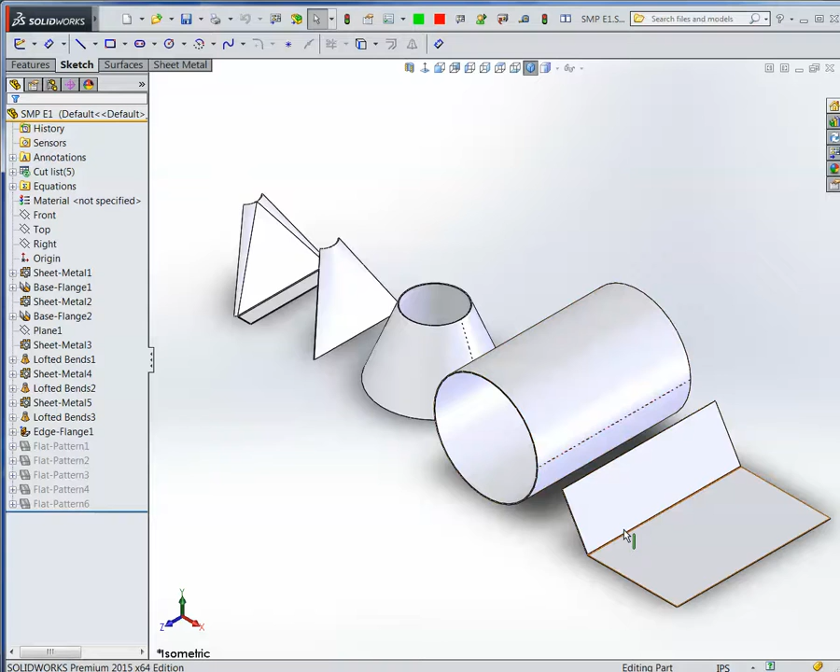The features are capable of generating, I'd call it the flat planar part. They're capable of generating a round or a radius part, like this one. They're capable of generating a conical part, and this one here is just a free-form part using the loft.

The challenge with it, once you use a free-form part using the loft, is there's really no planar surfaces on it anymore, so you can't really do much with it other than maybe pop a hole through it, using one of the front planes or right planes or top planes. You're kind of limited. If you can work around it and make your shape using a planar surface, a conical surface, and a round surface, it leaves you a lot more freedom in the future for what you want to do with the part.

I'm going to start with a new part. I want it to be a sheet metal part. So almost all the commands are grayed out. It leaves you with this one in the corner, which is base flange / tab. So it's actually two commands. You're either going to create the base flange, the starting point of your sheet metal part, or you're looking to add on to it by adding a tab to it.

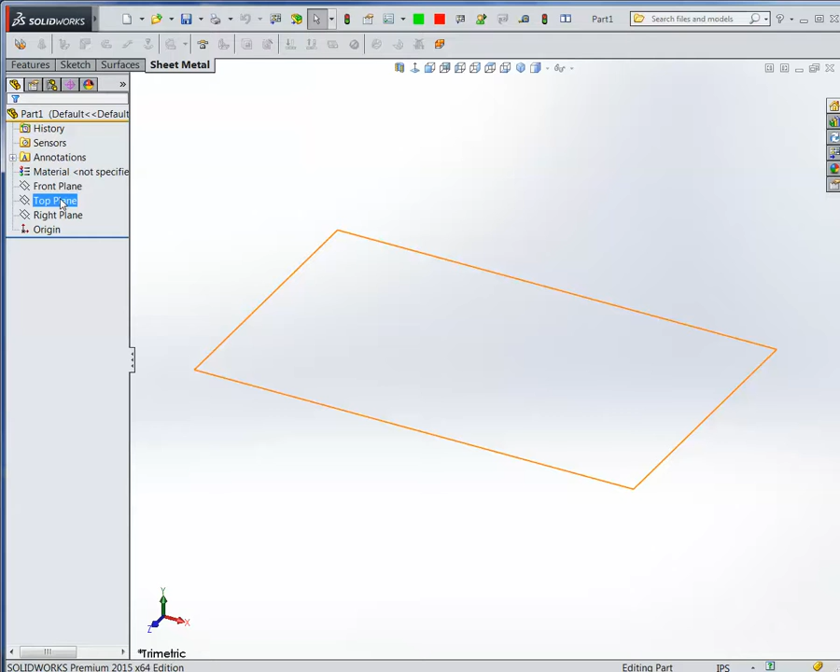A tab is just some more flat metal. If you need to add some flat somewhere, then you would use that tab portion of the command. But you just simply start. I'll pick the top plane and I'll pick a sketch, and I'm just going to sketch something. If you want a sheet metal part, you can sketch it, put your dimensions on it. If you want holes in it, you put your holes in it. If you want other features in it, you put your features in it.

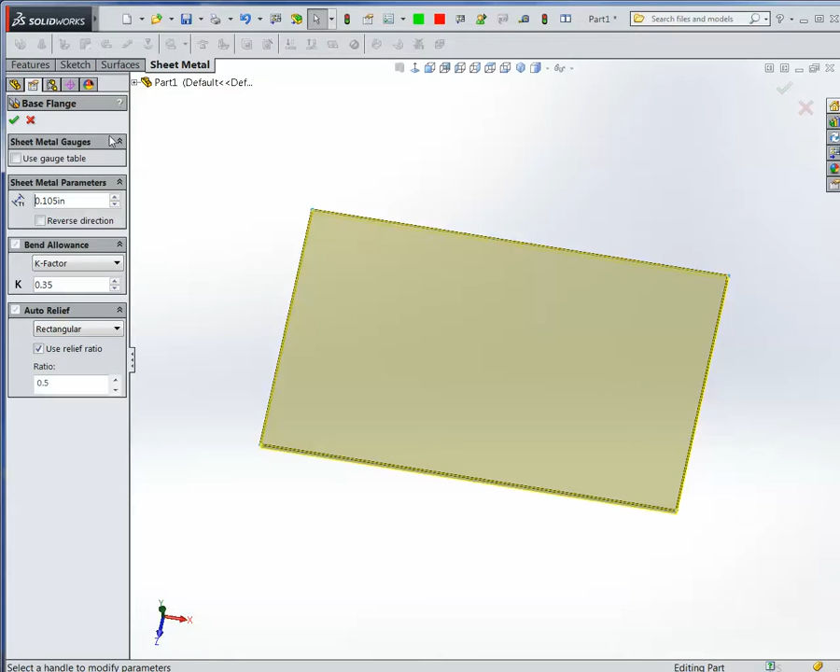If you have a completely enclosed sketch, you're going to wind up with, get it here. I'm going to pick a gauge. You're just going to wind up with that. It's just a nothing part. Whatever you draw is what you get. It's going to be one metal thickness, and it's going to have features above it and features below it that are related to the sheet metal properties and how it's bent up.

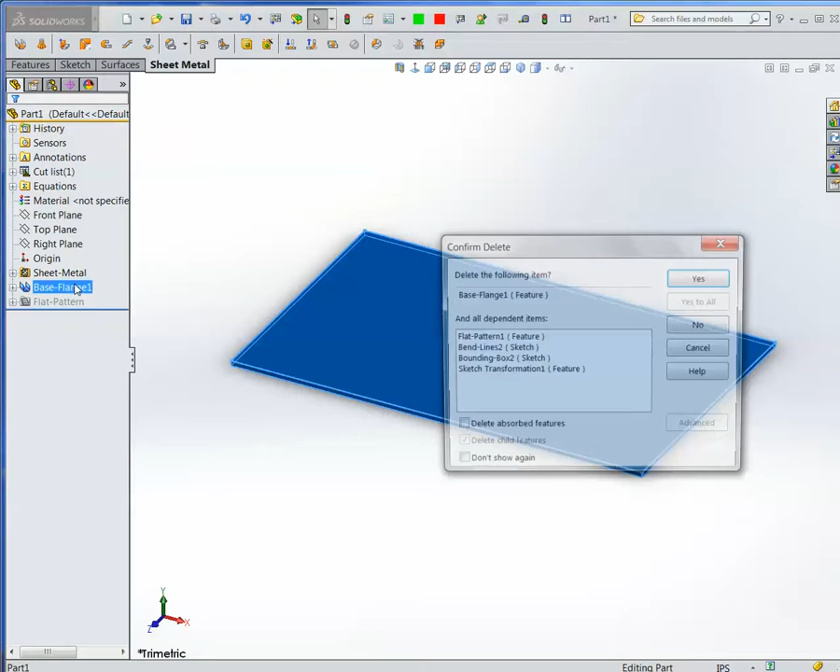And that command actually, yes, the command actually is identical to the command in the regular features for just a basic extruded command. I can do the same thing there, and I can pick 60 thousandths, and I have the exact same part. It just doesn't have the sheet metal parameters attached to it that came from the gauge table.

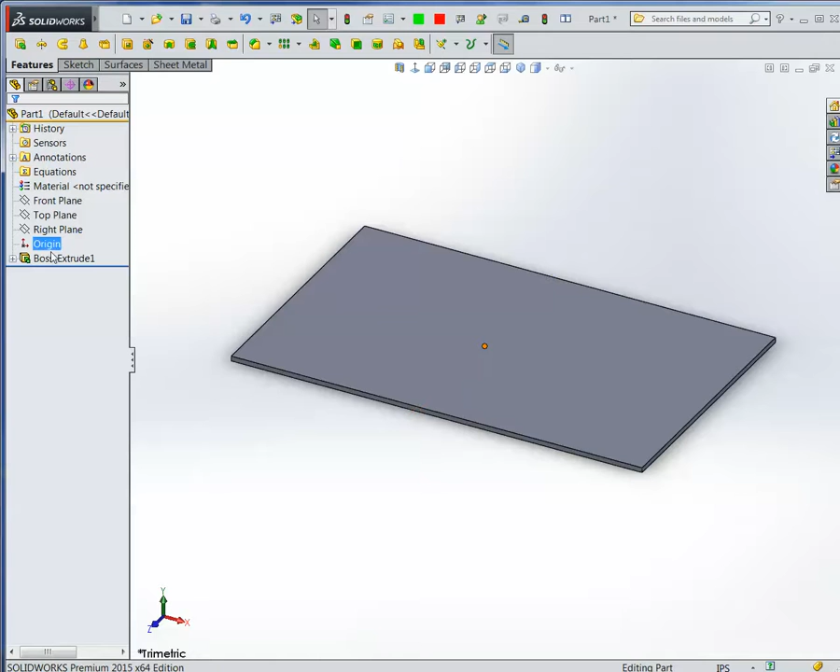If I back off from that, so if my part is predominantly flat with maybe a bend here or there, I would start with a closed-in sketch. If your part is not predominantly flat, you can start with the shape that you would see as you stood down the side of the press brake. And if I see something there that's a couple inches, two by 6 is fine. I could draw my shape.

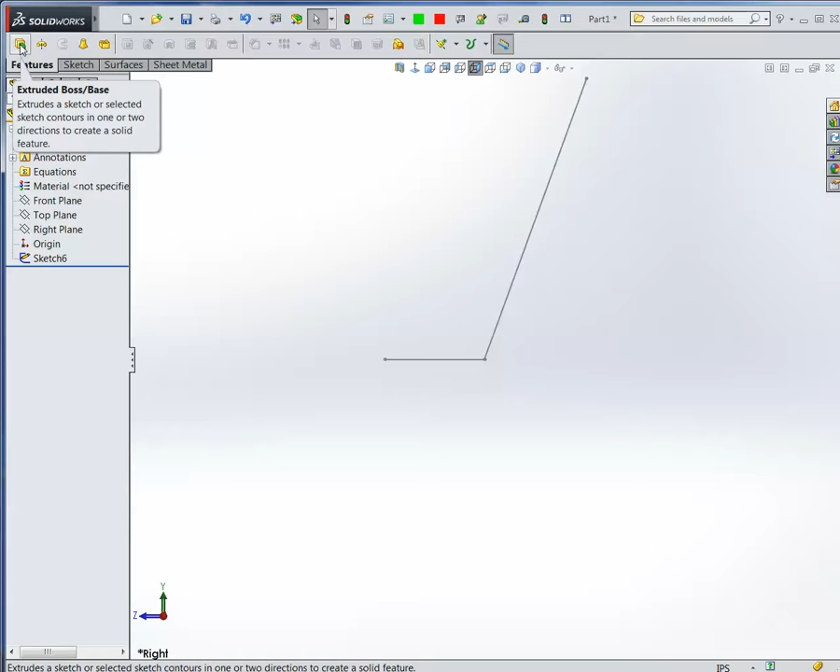Now, if I were to attach that to the regular extruded boss, it would default to a thin feature, and it would let me pick the thickness. I say 60, and I want to auto-fillet it, and again I say 60, and I want blind, 12 inches.

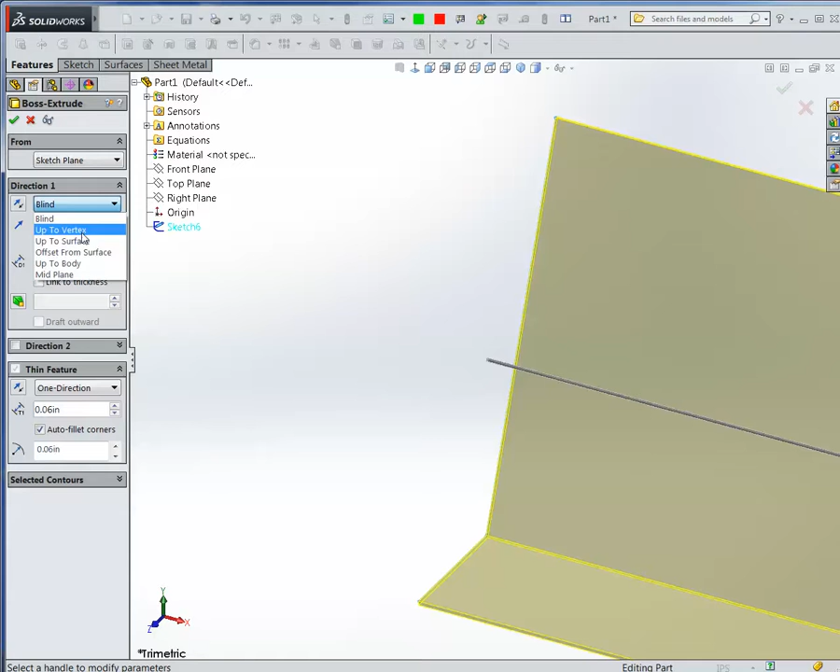I get this part as if it looks like it's press brake formed. It has a 60 thousandths inside radius, 60 thousandths thick. So it's a command we should all be used to if we use the SolidWorks features. But the base, if I want the sheet metal properties, I can take the exact same shape and I attach it to the sheet metal.

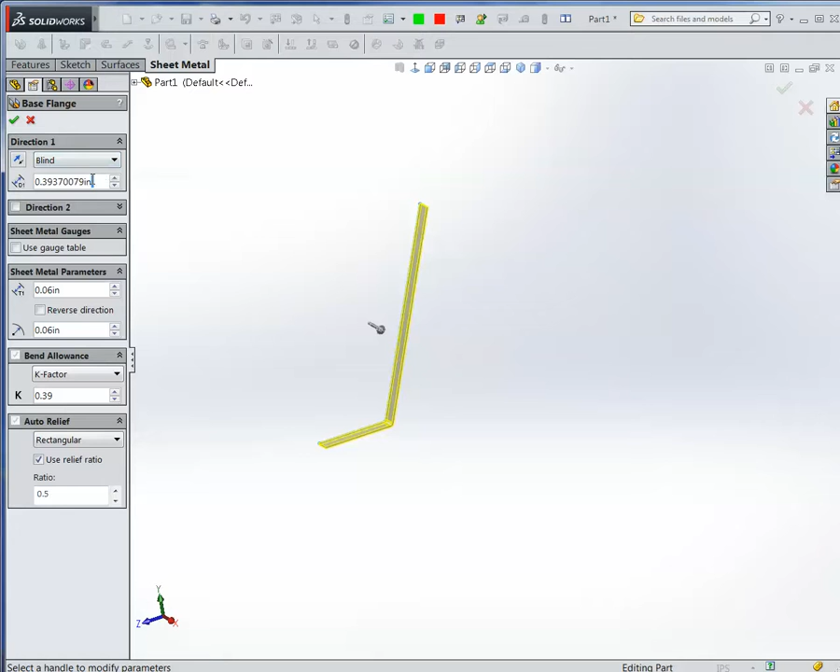I do the same thing and say 12. Use a gauge table and say 16 gauge. And I'm set up with all the same geometry, all the same shape, except it adds this folder at the top and a flat pattern at the bottom. So the command is no different than the one we find here. It just adds other features.

If I look at what I selected, a gauge table. I picked 16 gauge. When I pick 16 gauge, it's an Excel spreadsheet that gets information from it. The spreadsheet has on it this typing of 16 gauge. It has an inside radius of 60 thousandths and a K factor of 0.39. So it's things that we figured out a long time ago. We set it up in a spreadsheet, so we don't have to figure it out every time. We just click the gauge table and away we go.

Are you using a different K factor for every gauge? I'm using a different K factor for every gauge. And if I want, I can use a different K factor for every radius. If I got a 16 gauge with a 1/16 inch radius, I use one K factor. If I have an 1/8 inch radius, I use a different K factor.

And we all understand what a K factor is? Locate your center point. It locates what we call the neutral axis. Yeah, zero stress. If I look at, where's my K factors? So my K factors, here's the spreadsheets form.

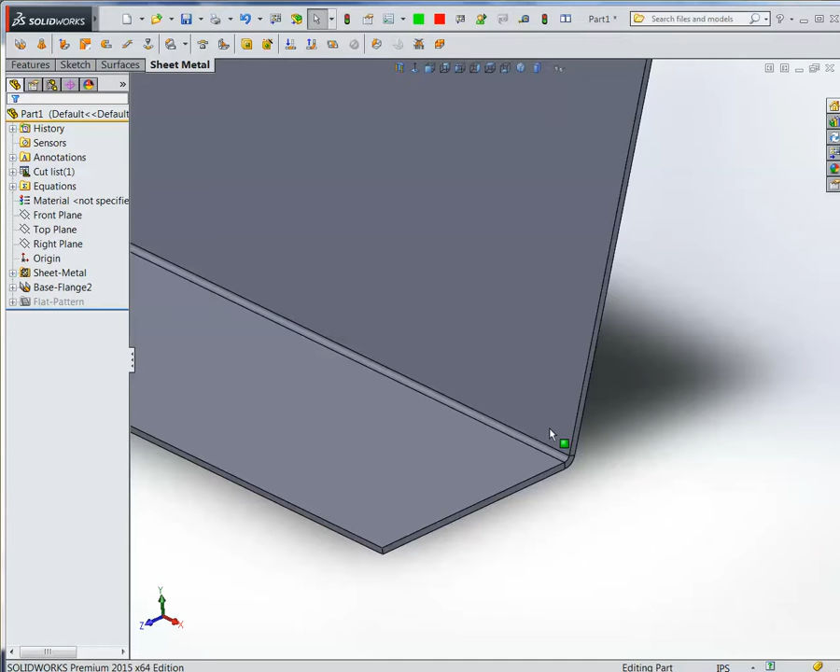Are you typically making the radiuses the thickness of the material? We do. They might not be that when I get it, but when I had to decide how to model it up, they really weren't a radius. They're kind of smashed in the corner and deformed. So in the end, I just said, okay, I'm going to call the inside radius a metal thickness, and I'll keep changing the K-factor until my flat pattern gives me my blank, and then it's just modeled up that way.

If we look into what we're actually getting out of the gauge table, we're getting the things I said. It looks like a 16 and a small GA because that's what I typed in. It's 0.06 because that's what I typed in, 0.39. But then it adds another feature down here, which if you want that in there, you just pick something. But to me, that's not the best auto relief.

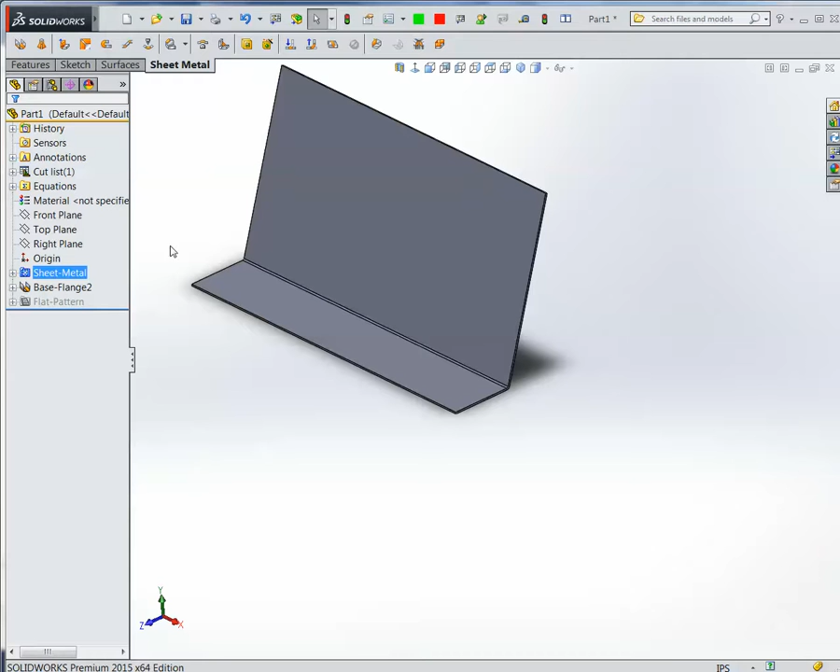If you're already familiar with sheet metal, to me the best auto relief, if I go to add a flange on... I'm going to assume you don't know this command. If I want to add a bend, I'll go to the edge flange or one of the other ones. If I want to add more flat, I'll go to this one, pick a surface I want to add flat on and just add some flat off to the side. And whatever you draw is what you get.

If I want to add a bend on it, my favorite is just pick that one. It's going to add a bend on it. And you're looking to select an edge, like this edge or that edge. Either one is fine. You pick the back edge, and when the command starts, it'll pop out the back side.

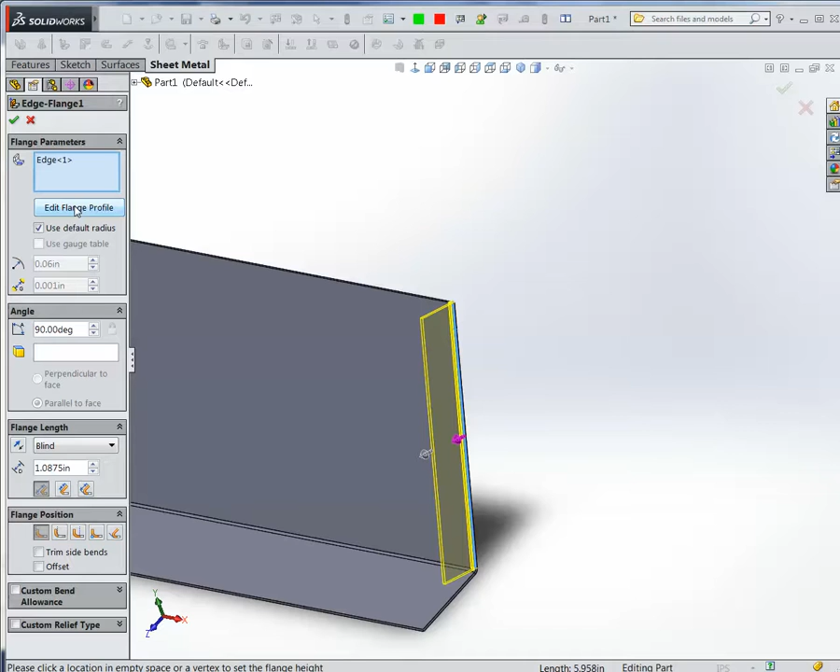But then you can just move your mouse and it'll go a different direction. You pick the front, it pops out the front side. So you can move your mouse and it goes either way. So you go from there to the sketch, just edit the profile, and you can put dimensions on it how you want it, but you can drag this up.

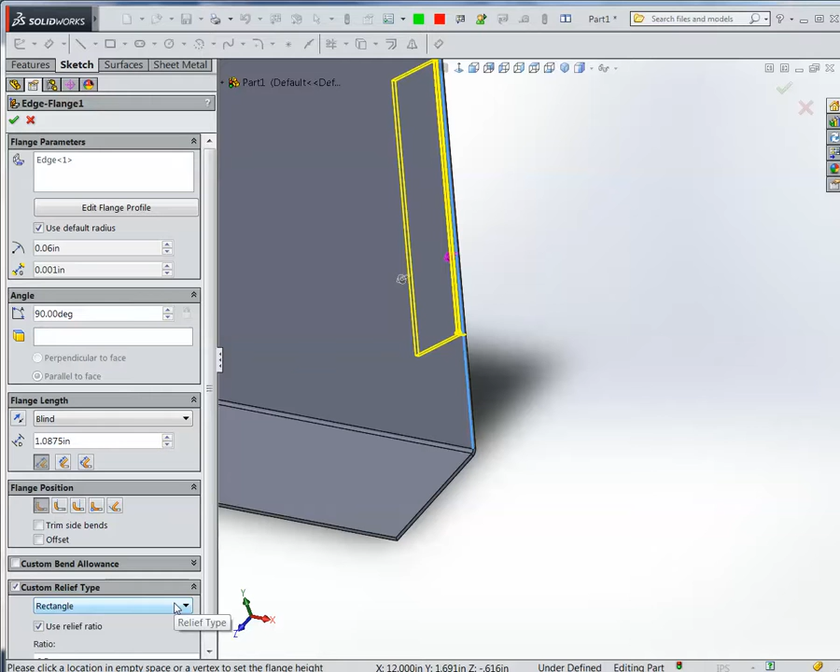And rather than put a cut in it ahead of time and then bend above it, you can just drag it up and put a dimension on it where you want, but then you pick your custom relief down here. And the best one from my perspective, the most cosmetically appealing, is the obround. And you don't use that, you start specifying it yourself. And this is what it's putting in. It's putting in a relief cut right down there.

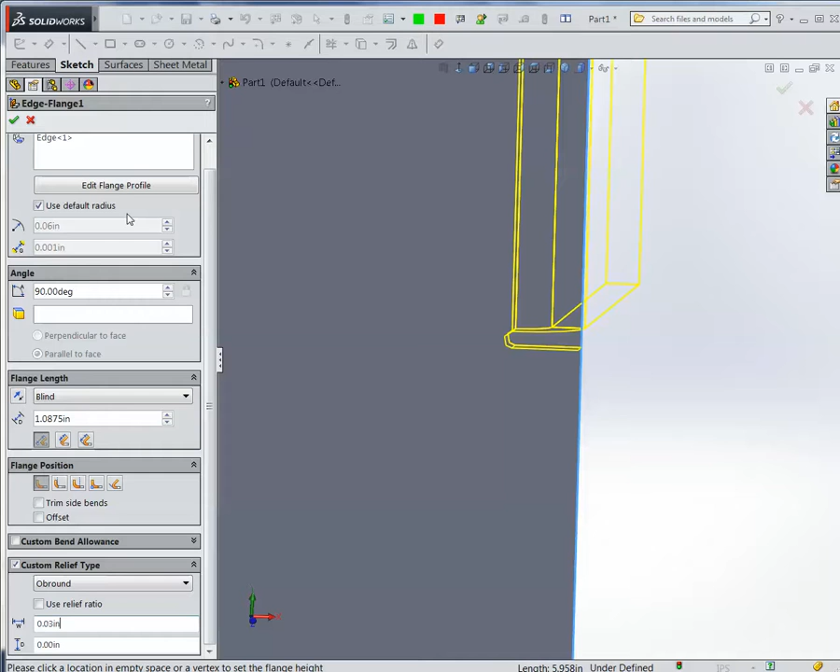And the best one is the width. You can say it's 30 thousandths, that's this. And the depth is the straight. After it gets past the tangent, it gives you some straight before it takes the curve. The depth is that straight, and I like to set that depth at 0. So it'll give me a minimum cut, because it comes right in, and as soon as it gets to the edge of the tangent, it'll take the circle and come back around. You put 30 thousandths in there, it's the least offensive, it depends if the gaps bother you or not.

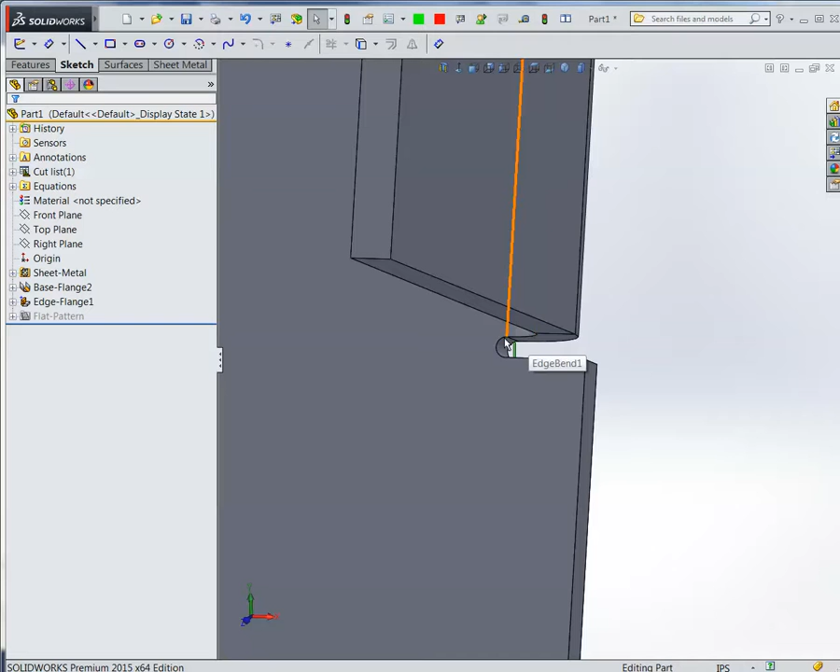Here at FOG, all our metal is typically 12 gauge with a number 7 polish on one side and number 4 on the other side, and we don't want to weld it. We just want the mirror look on it, so we want it to look as cosmetically appealing as possible. So we want as thin as possible with a nice radius. Now later on put an 1/8 inch radius on this corner.

What is that feature called? It was right in the bottom. It's a custom relief type. It's looking to relieve the metal here as you put it out. See, before you know what it is, you'll go in here and you'll put that little relief in yourself. Then you click the top edge to put your bend down so it's all in the right spot. But you don't need to. It's going to put it in automatically.

But if you use that feature from here, this is the relief type. If you say obround, which is a nice one, and we go in here, I don't click custom relief. I just let it be obround. Then it's not going to be what I want. I can't control this. I can't control its diameter. But even if it's obround in the default, I'm still going to go in here and I'm going to say custom relief, and I'm going to uncheck this ratio, and then I'm going to specify the 2 numbers.

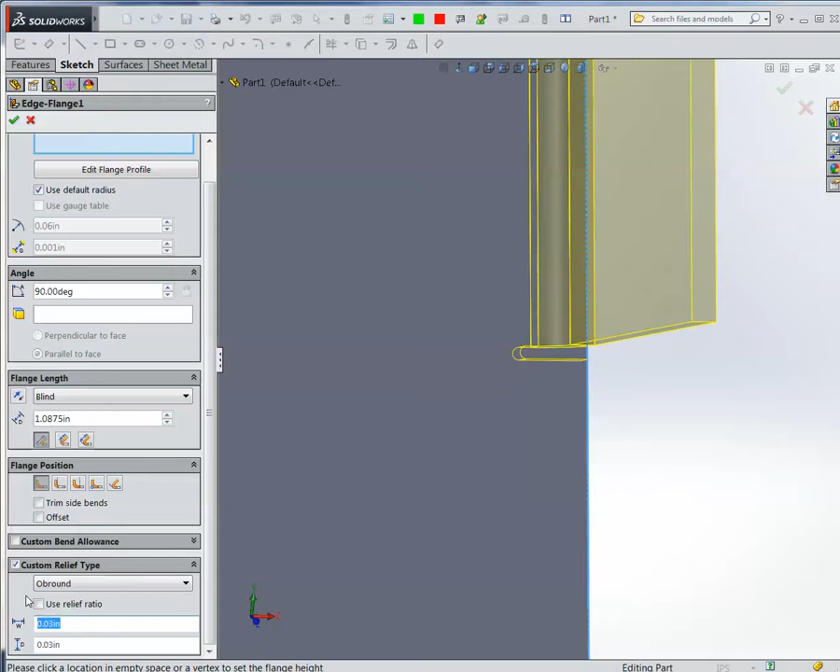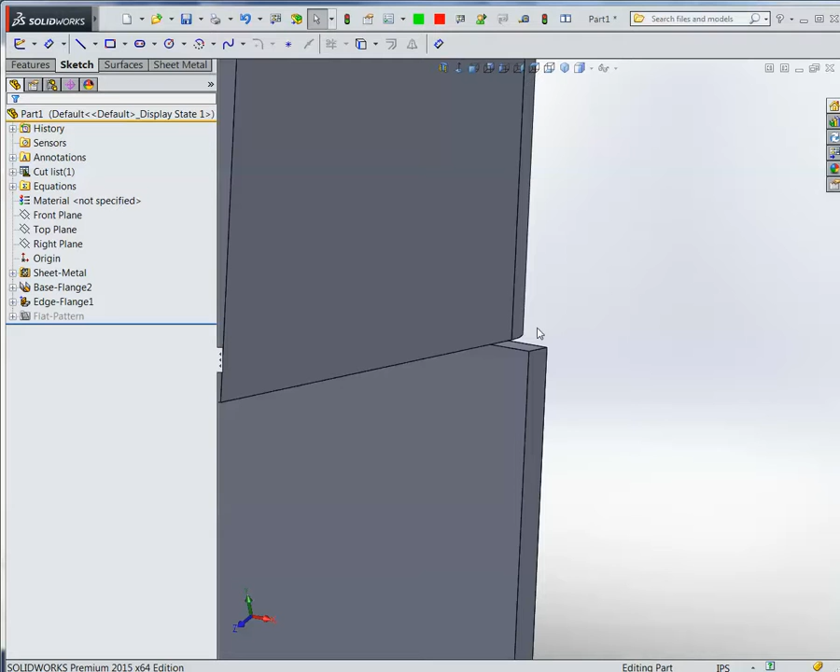And when I worked for Mike Fogg, he asked me to design the enclosure for him, so I designed it. And after it was all built, he asked me to come in and put it together, so I came in to put it together, and the first thing he does is he hands me a file and says, go take all the burrs off. So you go spend hours and hours down there taking all the burrs off. Then I went home and got out all my drawings and put 1/8 inch radiuses on every corner there was.

And for 12 gauge, you put an 1/8 inch radius on. It comes off the laser and you really can't see the radius, but when you rub your thumb across it, it's no longer sharp. And technically, even though it's small, it's faster for the laser to take a corner with the radius on than it is to go to a dead stop and change directions. So go for it, make it look nice.

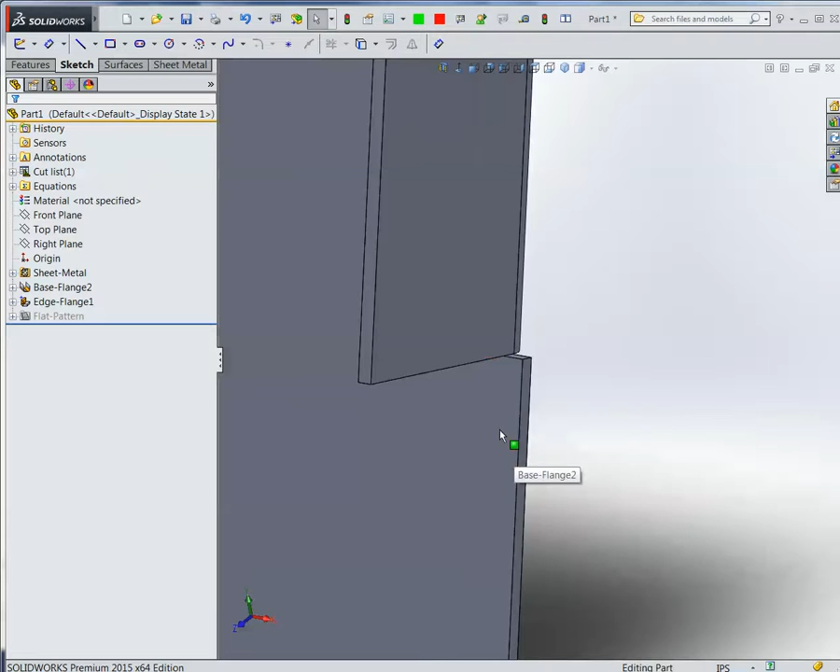Because our machinery, we put our machinery out in a plant that fills bottles. It's pretty dark and dingy. But ours, we light it up and its mirror stands out. It stands out like a sore thumb. It's part of what the appeal of the equipment is, not just simply its function, but also the cosmetics on it. And it's enjoyable to see what you can do to make your parts look really nice.

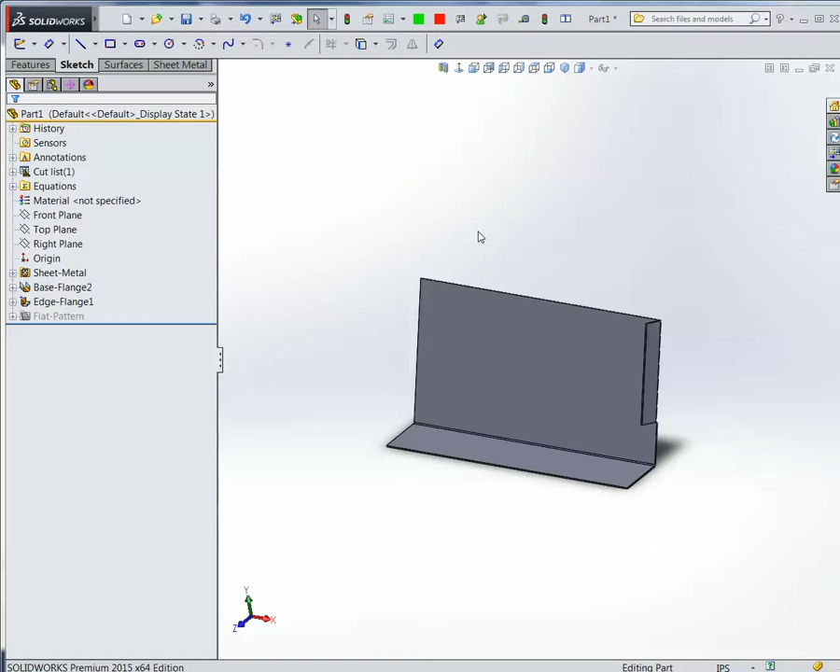So that's one way. If in putting on that flange, you decide you want more than one flange, technically you can grab more edges.

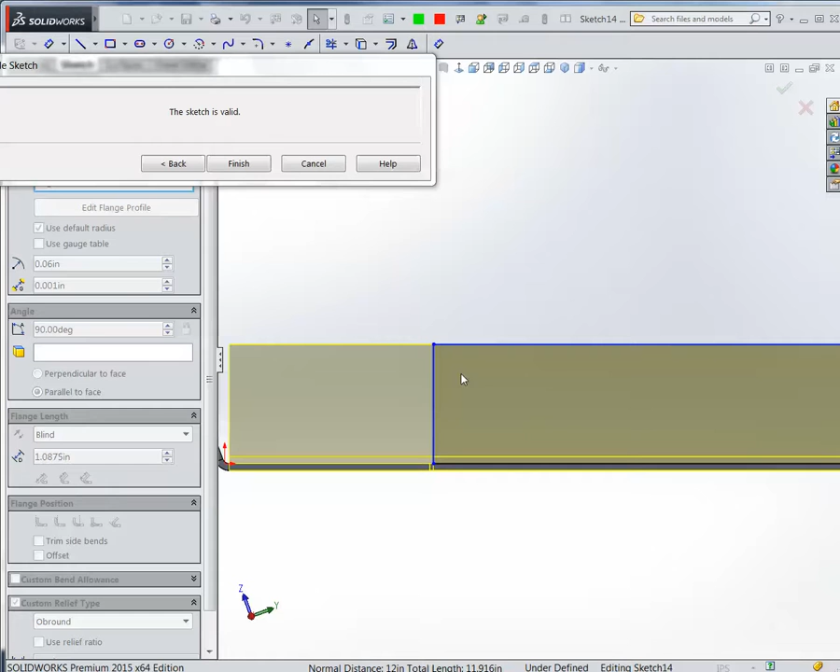Then if you want to edit the profiles of them, you click the one that you want to edit, and then this will take you off to the sketch of that one. If I get this out of my way, and I can do what I want. It has relationships on it. It says vertical. If I decide I don't want that vertical, I'll delete the relationship and I'll make it into something else, whatever I want it to be.

I think I can even put a hole in it. If I say finish, there's the hole in it. So I can do whatever I want with that flange when I put it on. The only problem is if you put 2 or 3 on at once, it'll miter the corners nice for you, but if you want one of them less than 90 degrees, the other one's 90, I don't believe there's a way to control each one individually.

So if I put them on one at a time, I can control that angle individually through each command. So there's advantages and disadvantages. It looks like a smaller feature tree, but there's also less control over it. So that's one way of putting a bend on. I'm going to change the shape.

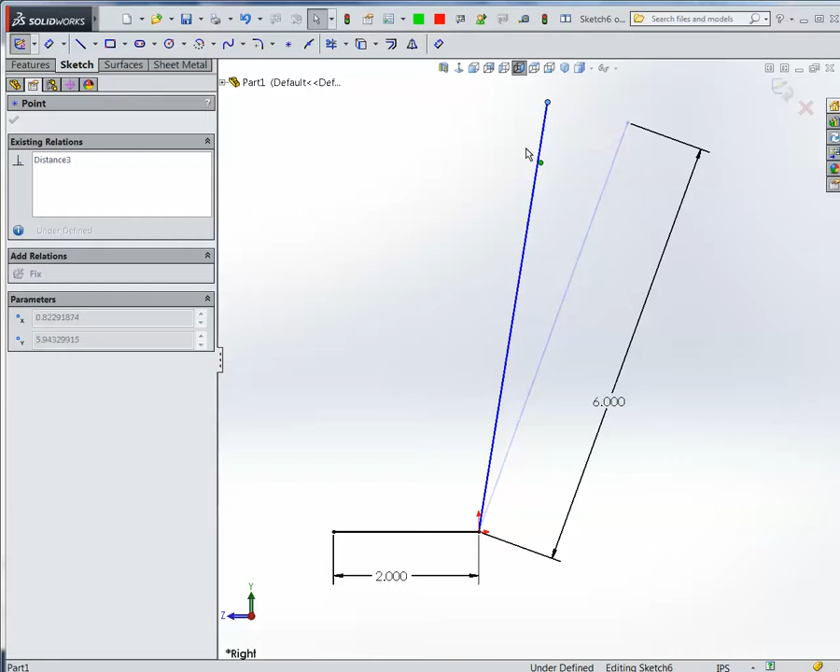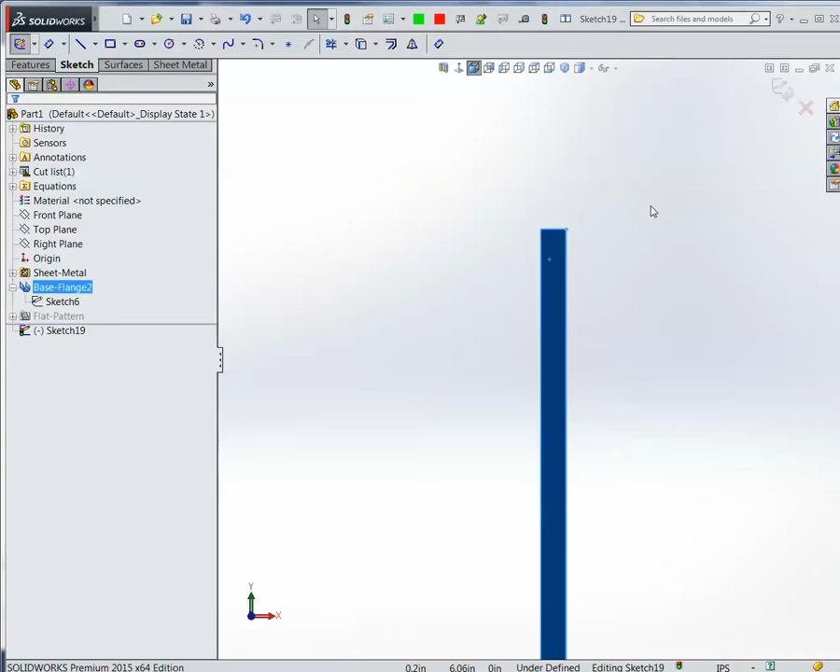Another way is if this edge here has multiple contours, if it goes up, then over, then up, you can actually pick the front surface, if you will, and pick a miter flange. It goes perpendicular to it, and then you can draw your bends on it. You can say, I'm going to come out there, then I want to do this, then I want to do that. And it'll take that profile and it'll bring it out for you.

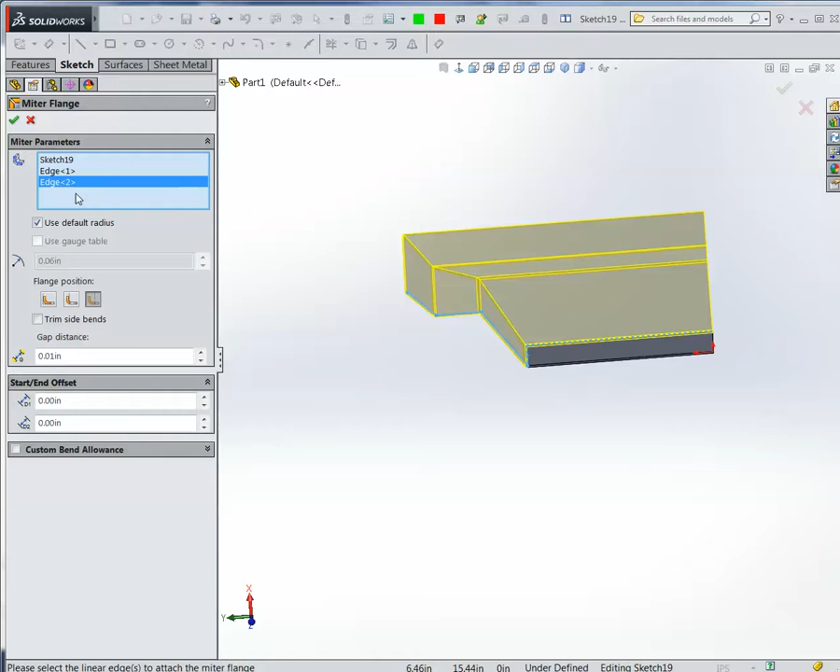If you want to wrap that around the corner, you can pick the back edge one up. It'll miter the back side for you. So typically that's what you want to do it for, is if you have complicated shapes and you go around the corner, you'll pick that. But another wonderful feature is if you have more than one shape and you know exactly what it is, how far over you're going, how far up, you can put them all in at once.

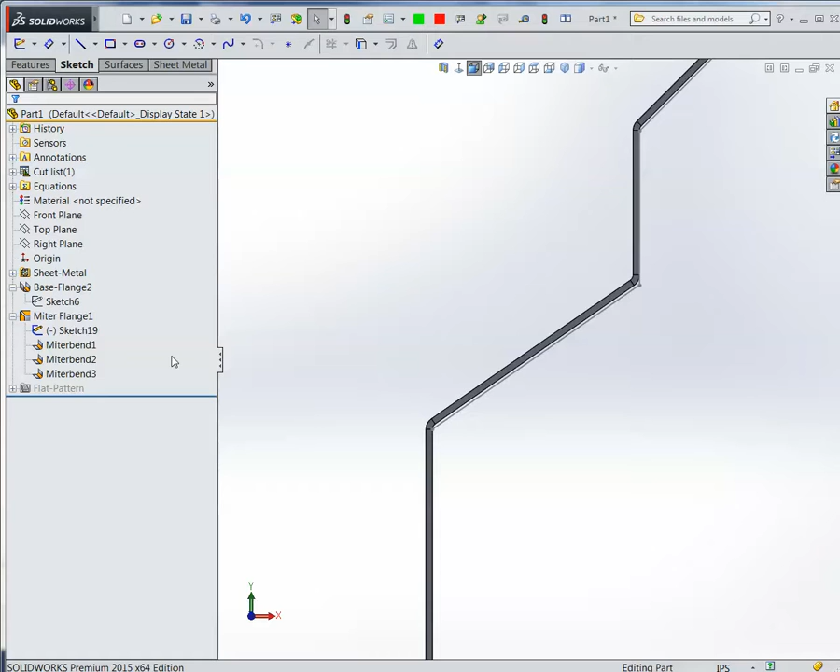The only thing you really need to do that I didn't do is, rather than start like this, you can see what happens when you start like that. It really didn't follow it. See, there's my sketch line. Well, that's a lot of stuff that's turned on. It really didn't follow that first one, so on the first one, if you really want to do it differently, you really want to come down and put the actual radius in, make it tangent to that, and specify it as whatever your radius is. Like mine is 60 thousandths.

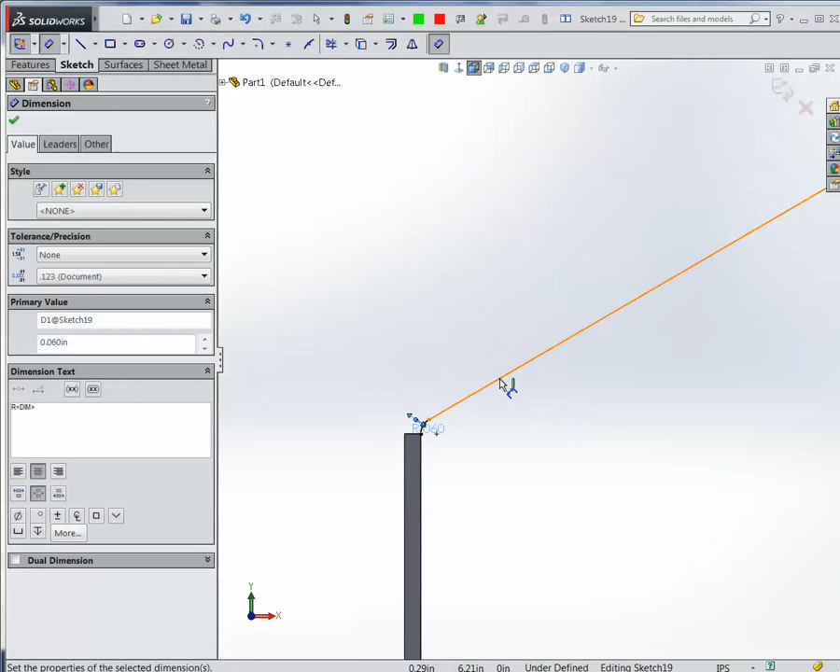When you do that, whatever you drew, you can see it in there. Whatever you drew follows the line that you drew perfectly. But you put your 60 thousandths radius in? If you just start from, I put it in here. I didn't put it in. If you want to, you may, but it goes to the theoretical corner. And here it goes to the theoretical inside corner. But the first one, it doesn't. It likes to take off. So if you put the first radius in, if you're going to extend it beyond that surface, then it'll follow your line perfectly going around. Get that or no? Yeah, okay.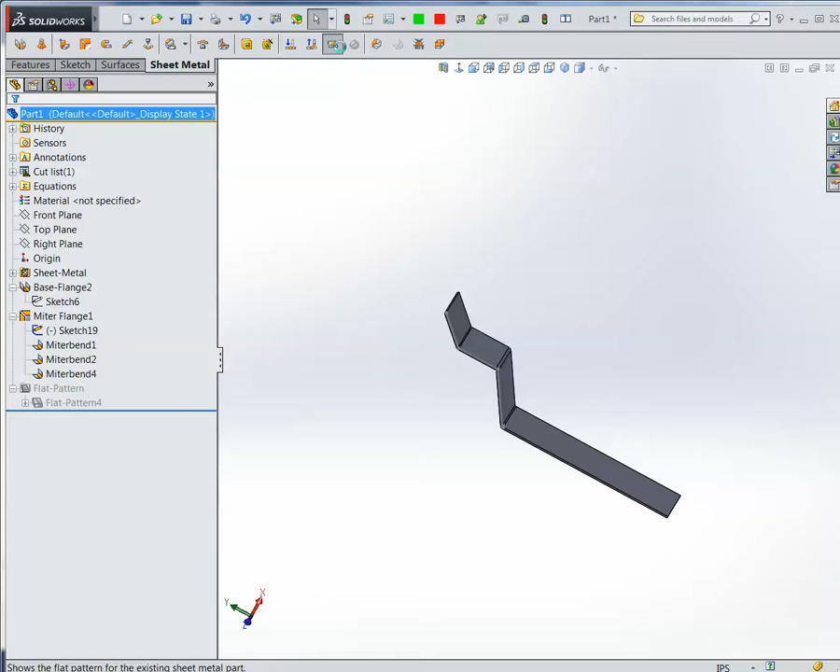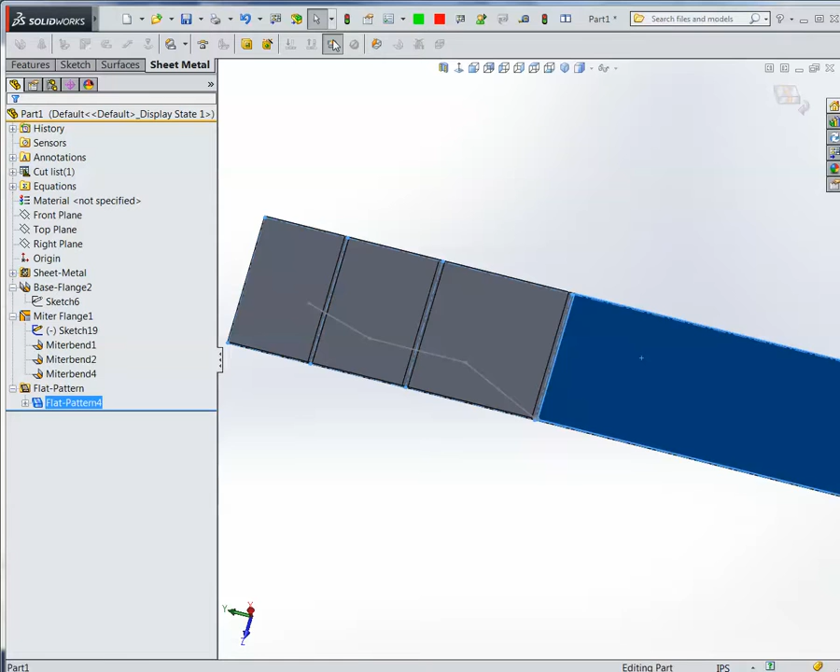So if I look at the flat pattern, find where to flatten it. Edit feature. What you get for a flat pattern is whatever flat surface you have, the flat pattern is exactly the same size as before it was flattened. So this one had a flat surface here followed by a radius, a flat, radius, flat, and the flat pattern will have the same thing. The flat, its calculation for the radius, the flat, its calculation here, and so on.

And the K factor itself is simple math. In calculating a flat pattern, whatever this is in the formed part, it'll be the same in the flat pattern. And it has to figure out how much metal do I need to bend that. And mathematically, the arc length equals the radius times the angle.

So whatever the angle is, if it's 45, then it'll be 45 times pi over 180. That'll give you the angle in radians. And you just got to figure out, you know, what radius do you use? Do you use this radius, or do you use this radius, or do you use one that's somewhere in between? And the goal of the K-factor is to figure the one that's in between.

The K-factor can range anywhere from 0 to 1, I believe. 0 means don't go down at all. Use that radius. If that's 60 thousandths, you'd use that. If the K-factor is 0.1, it'll go 10% of the way down, and it'll use that radius, which is a longer arc length. If you go halfway down, it'll go halfway and use that radius. So the further you go down, the more material it'll give you for the piece that it's flattening out.

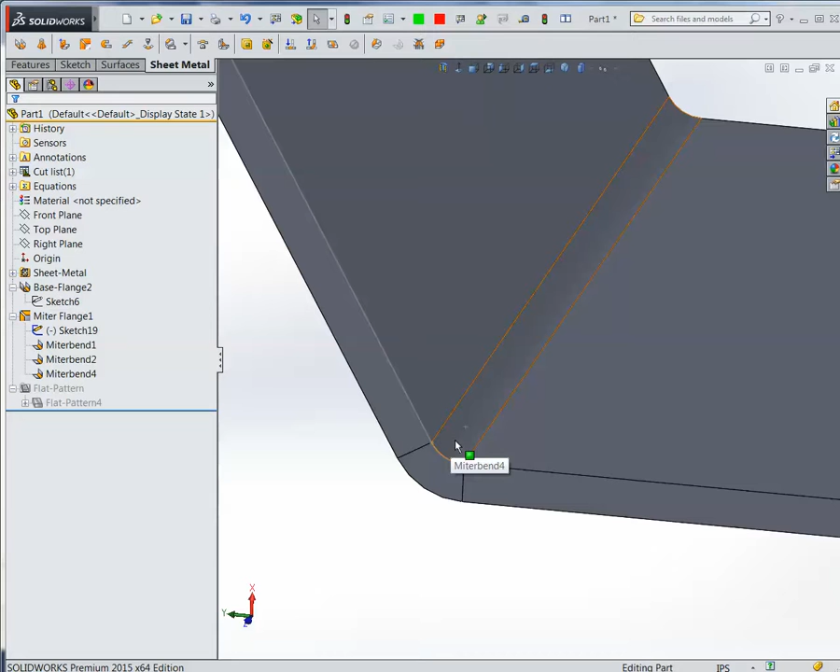And really the only way, from my perspective, to get the right answer is to, again, laser cut some parts, bend them up, and measure what they are, and keep changing the K-factor until it matches what your tooling gave you. You always use 0.39? No. What do you change? Depends on the machine. That sheet metal thickness with that tooling that they used. I asked them to give me the tooling you're going to use on 12 gauge and bend it with that. You don't put something strange in. Whatever you typically use, put that in. And that's what I needed to give the right answer.

And typically, from my perspective, it's usually about a third. You know, say 33% or 35, somewhere in there. You'll be pretty close to a right answer. From there, you can tweak it in. That's if you use the radius of one metal thickness.

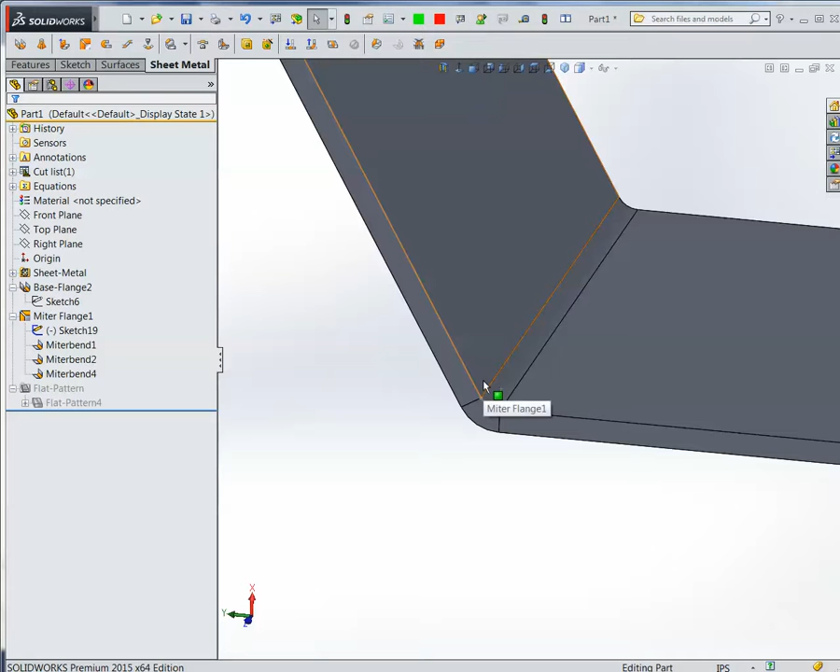Oh, and sometimes we will want to bend it, but not on the press brake. Sometimes we'll want to roll it. So we want a radius part coming out. So you uncheck the default radius, and say you're going to put it through your rollers and you want a 6-inch radius, and you know, my part disappeared there. I think like 1 inch. Great. You want 1 inch? I can go 1 inch. If I want 1 inch, I want it off the part. I can do that, but if I'm going to do that, I need to go change the K-factor, because it's not going to be the same as if you stuck it in with a 16th inch radius. And typically, if I go roll it, I'm going to go closer to 0.5 if I go through my rollers.

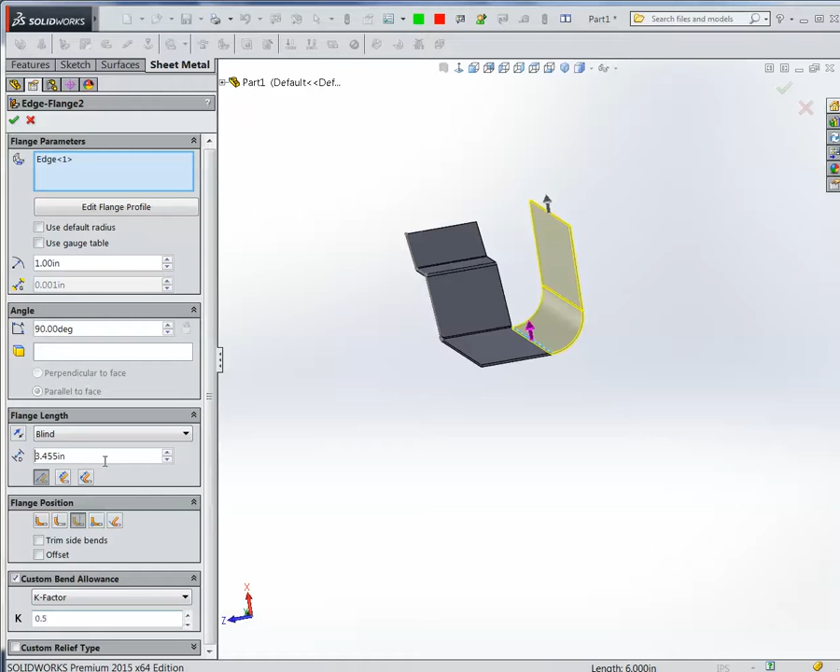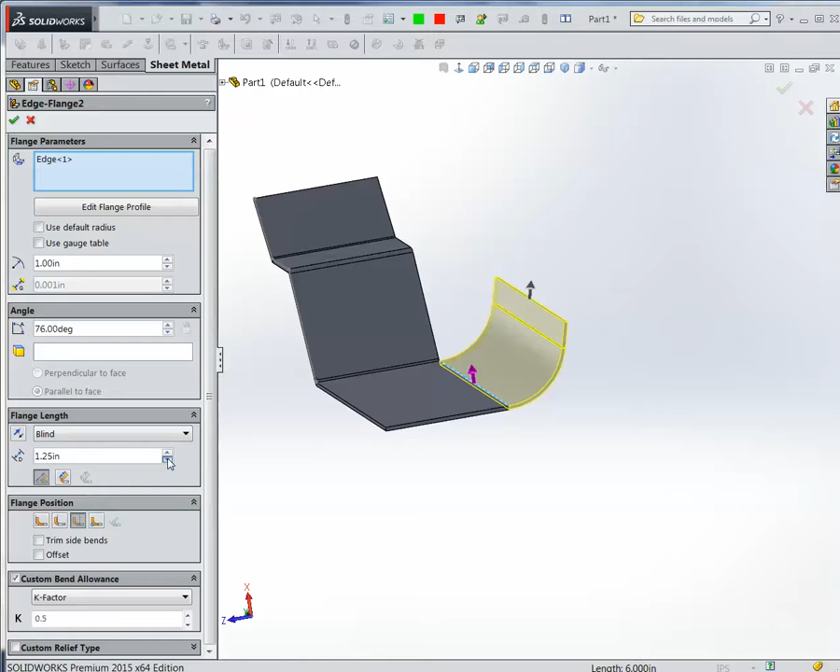And if this disappears on you when you change the radius, it's because you don't have enough metal to complete what you asked it to do. I said 90 degrees at 1 inch, but I said my blank is only 1 inch long. I got to make my blank long enough to finish what I asked it to do. And if I could go back down and say 80 degrees or something. As soon as I get below that line, it's going to disappear. So if you're wondering why it's not working for you, you just haven't given it enough metal to do what you asked it to do.

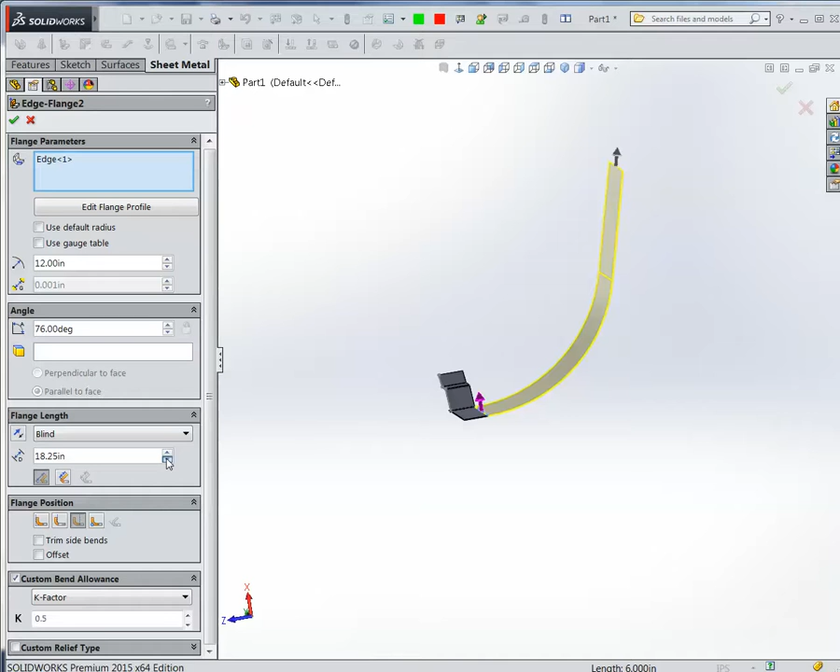So we will frequently, say, put a 12-inch radius in. You know, if we have a part that goes through the rollers, we'll put what we need, then I'll come back and I'll cut off the excess, because it's really hard to guess what you need exactly for the radius to hit the tangent. Just got to make sure it's long enough and cut it off when you're done. Okay.

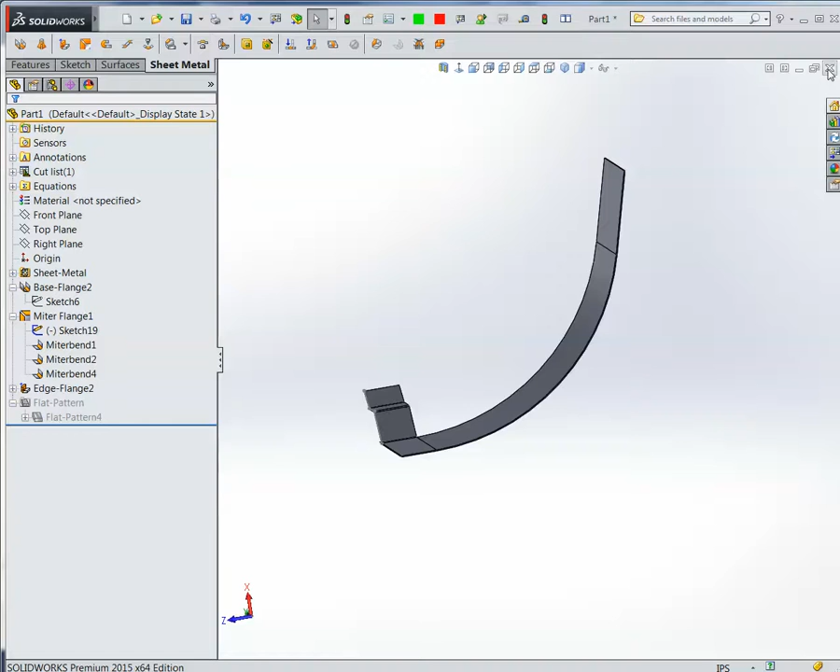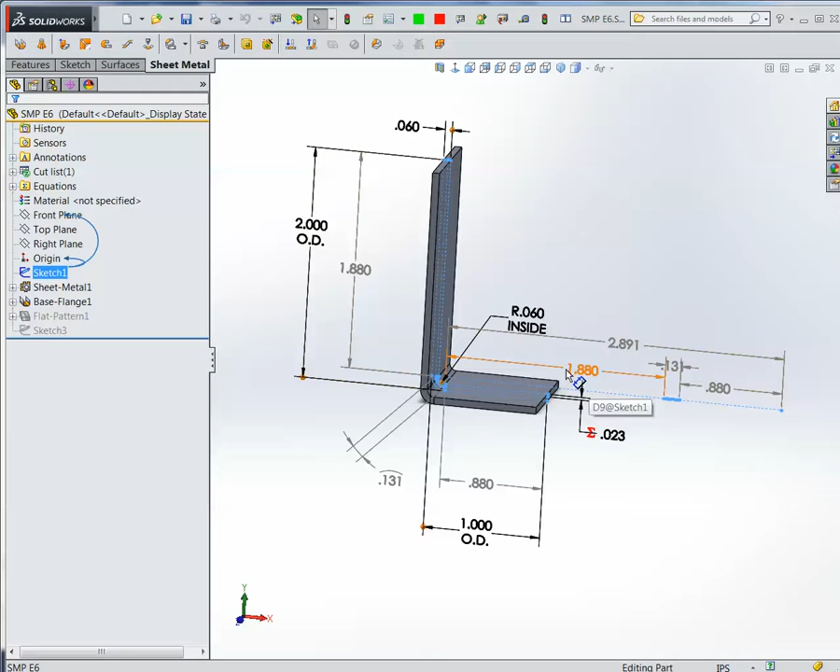This one I put in just as an experiment to observe what happens when you change the radius. I made this little bracket 2 inches outside by 1 inch outside. Then I put a straight line going across to simulate a flat pattern. So if I have a 60 thousandths radius inside, that leaves me 1.88 of straight, which I have there, 0.88 on the other side, which I have there, and an arc length of 131, which I have there. If I take it, we change my spin box.

I take that radius, if I make it larger, say if I make it 0.12, the 2 inches is going to stay what it is, but this is going to shrink by 60 thousandths, so the 188 will become 182, and the 88 here becomes 82. But then my radius arc length increases because I got a larger radius. It's radius times the angle.

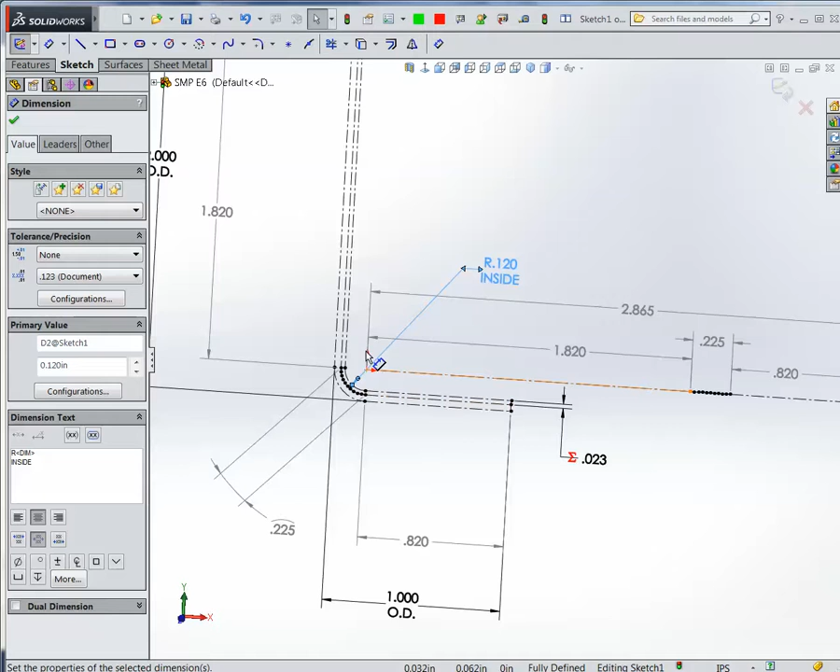But what I'm really interested in is what happens to the overall blank size as I change this radius. I'm asking for the same part no matter what. I'm asking for 2 inches by 1 inch. But what happens to my blank size as I change the radius in there? And you can watch if I make my radius larger, I got 2.865. Make it larger, the blank size is going down.

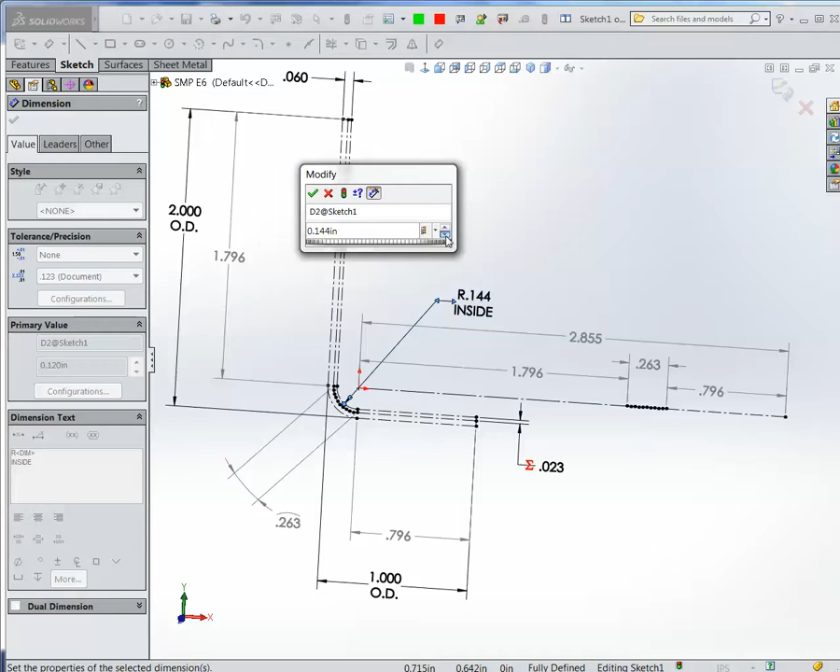And obviously if I make it the other way, the blank size will get larger and larger and larger. And the idea is, even though the overall part is the same, you're decreasing the distance. I'm cutting the corner, if you will. I say it's like going for a walk. If you go straight down, turn 90 degrees and go straight across, that's one distance. But if you get halfway and you cut the corner, it's a shorter path.

Even though my 2 inches by 1 inch hasn't changed, the larger my radius, the shorter my blank size will be. So you can't just take a blank size, change the radius and expect your part to come out correct. It won't come out correct.

I've had people make my parts and come back and tell me my blank size is wrong. You ask them, well, what tooling did you use? And you used a really sharp radius. Well, flatten it back out and use the one you're supposed to. I said, well, your blank size is right. It is what it is.

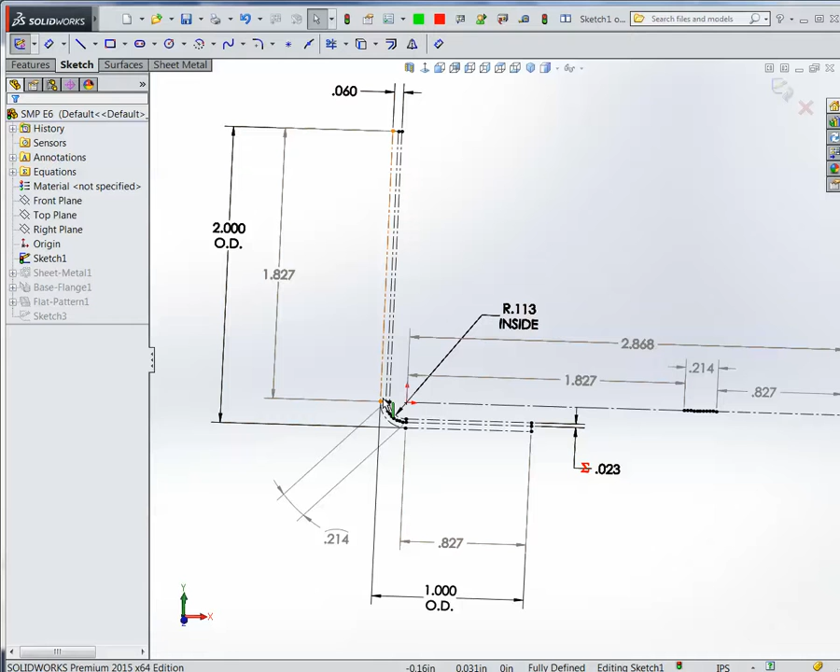It's pretty straightforward math, and that's really what SolidWorks will do for you. It's just a mathematical equation. It's a straight plus the radius times the angle plus the straight. So if it were 45 degrees instead of 90, the angle is half, so we'll give you half as much for that section of the blank.

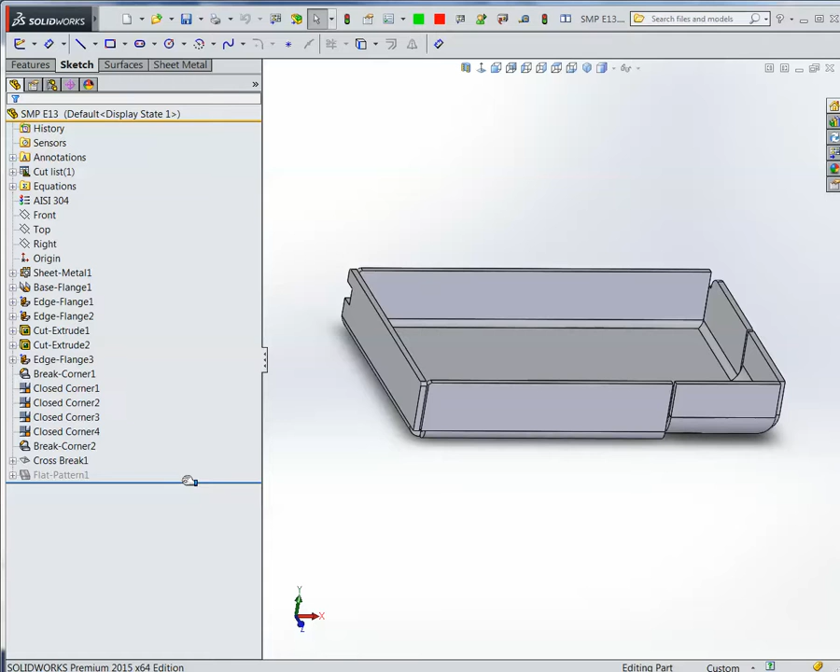I want to go to closed corners. And when you're done, you want your part to look really nice. And it doesn't look nice like that. That's my perspective. There's a command up in here called closed corner. And you could play with this corner to see what you want it to do. You pick one face and the other self-populates. If that's the look you want, that's what you select.

There are other options to close it off like this, or a weld corner like that, and it'll make the corner very nice for you. Closes it right up. If you want to weld it, you weld it. If not, we typically don't weld ours because we want the stainless to not have the burn marks on it. So you leave it open? We close it up tight like that, and we leave it.

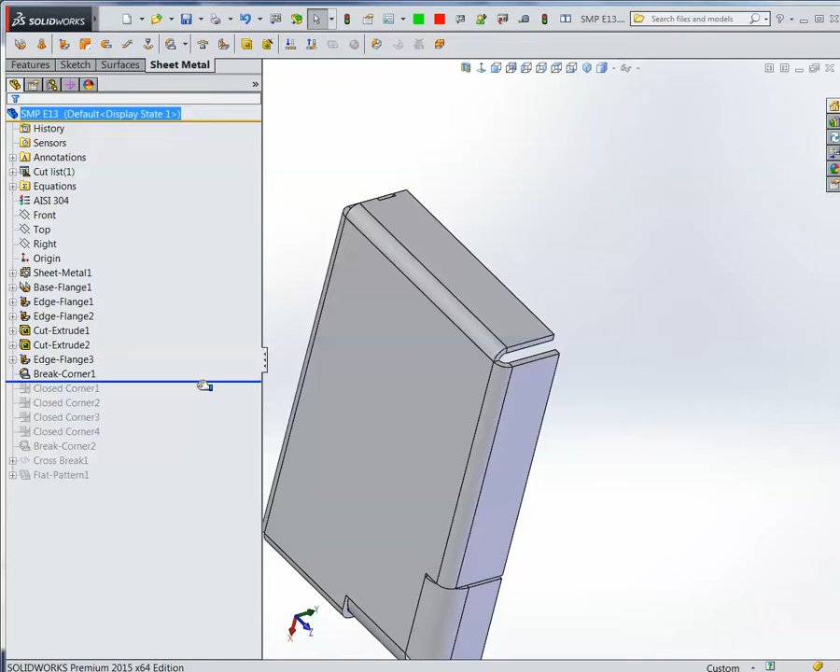Like that, where they're just tangent on the inside? Well, that's not a good one, but that is what we do. We bring them close. I'm trying to show the various features of it here. Open bend region. I don't want the open bend region. If I don't want it, then it closes it up for me. So there's other features inside of this closed corner that will give you various looks.

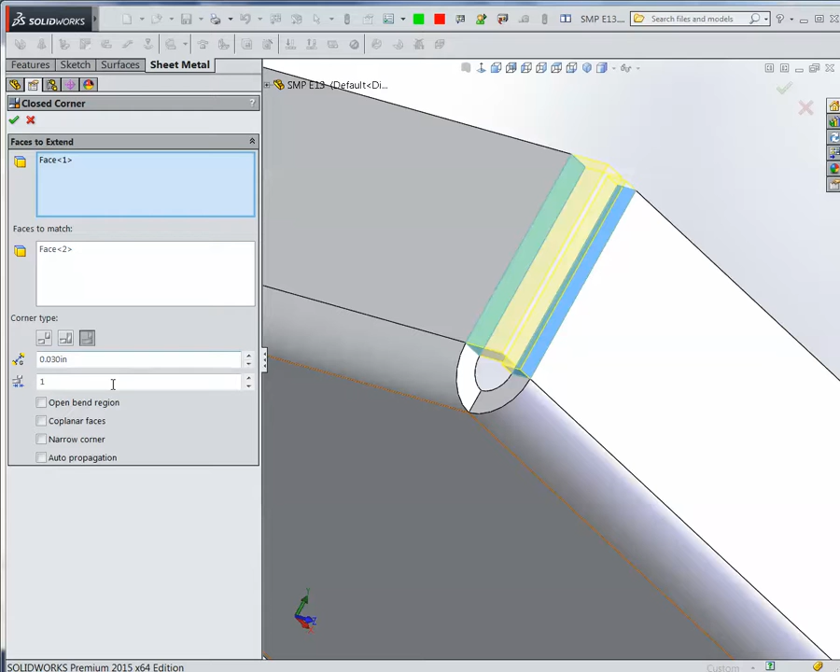And the coplanar face means it's looking for two faces that are the same distance apart. If so, it'll snag them both when you go to close it. Even though I only selected this one here, it's blue. I didn't select that one, but because I picked coplanar, it'll grab the other face and close it up also.

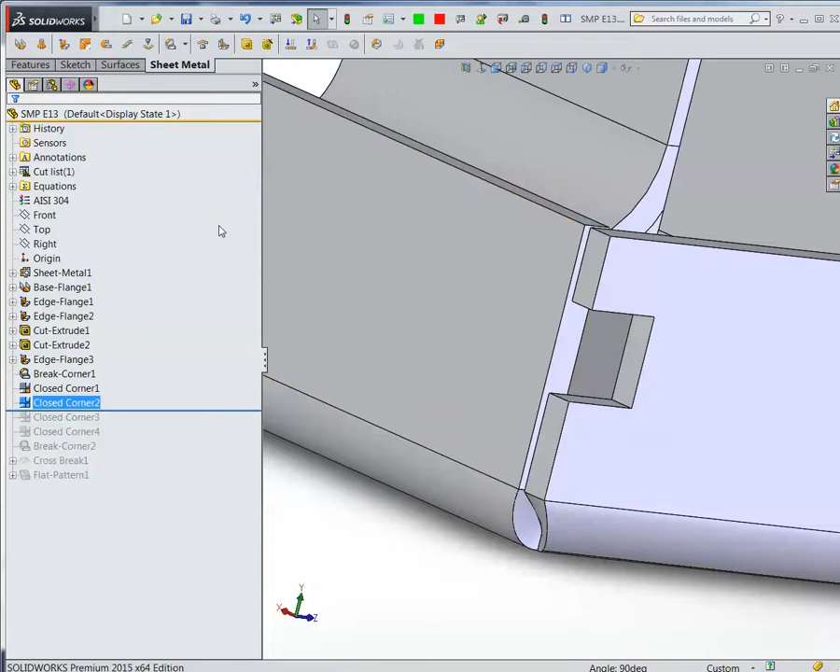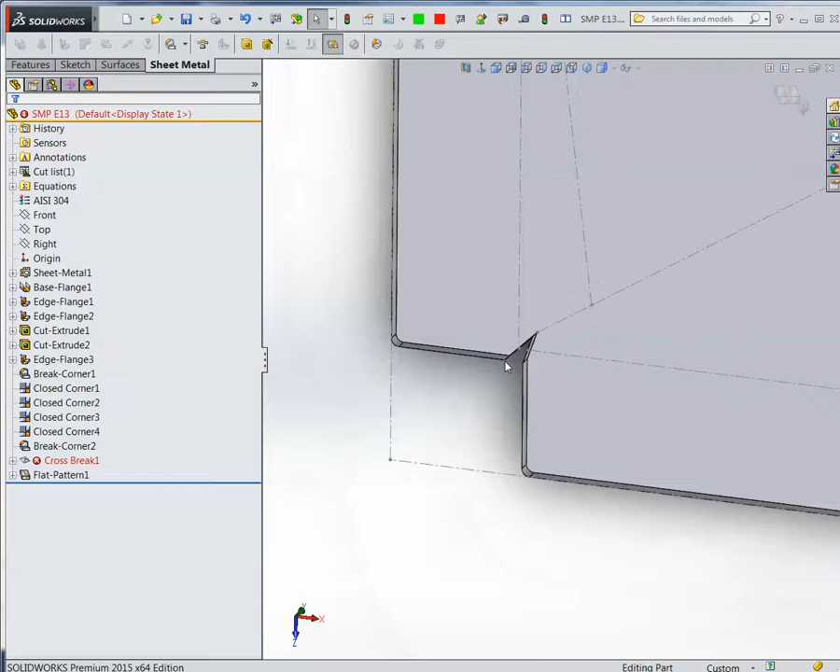And then you have, flatten that. What's your corner look like on the inside? Flatten all these. You're finished right there. That's not a bad look for cutting. It's not. Typically when I go in here, I'll put an 1/8" radius on there and an 1/8" radius on there.

Our product is in the food industry, and we don't want anybody scratching themselves, no blood on our product. So every corner there is, we'll put an 1/8" radius on. One of our products is a rinser which sprays a peracetic acid inside the bottle and on the outside, and the goal is to make the bottle sterile. The more sterile it is, the longer the shelf life.

Some of the juices we go up to 120 days of shelf life from 90 days. Milk, I think, is about 3 weeks. There are advantages to being extremely clean. There are advantages to having no one scratch themselves. And people pay a lot of money for a piece of machinery that'll give them an extra 30 days of shelf life, because that's all the less product they have to recall and throw away.

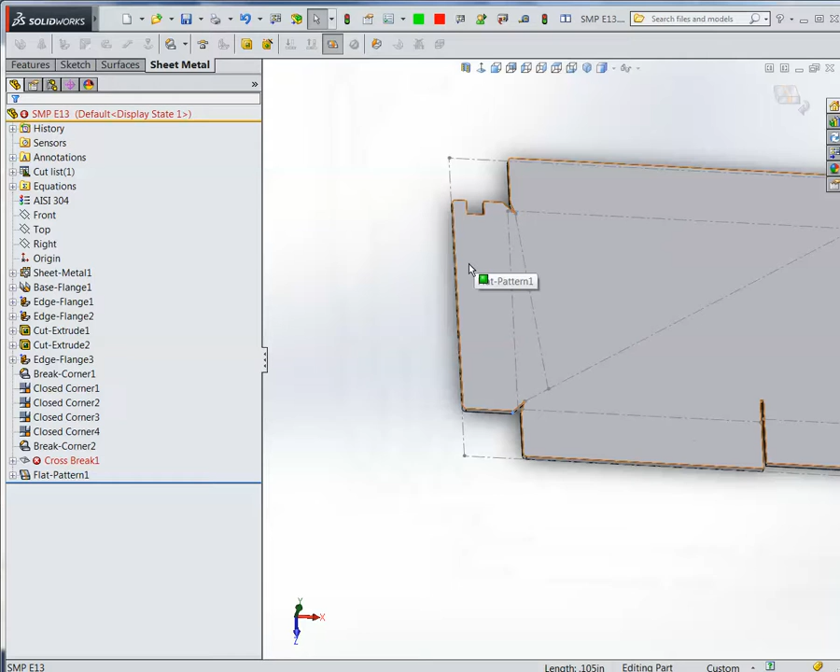So we have a high emphasis here, I mean, a high emphasis on the visual qualities. You know, even as the first set of enclosures we did, we put a number 8 on the outside and a 2B on the inside. And the customer didn't like the look of a 2B, because when you touch it, it leaves your fingerprint. So we had to go back and DA the whole inside, and from there on out for the past 13 years, after laser cutting it, we put it through a sander and put a number 4 finish on the back side. So every piece of 12 gauge we have is mirror one side and number 4 the other, just for the cleanliness and the visuals. So the visuals are very important to us.

Will you not pick up a fingerprint on the 8? On the mirror is okay. The 2B, you touch it, you can wash it, it just doesn't want to come off. It still shows the look.

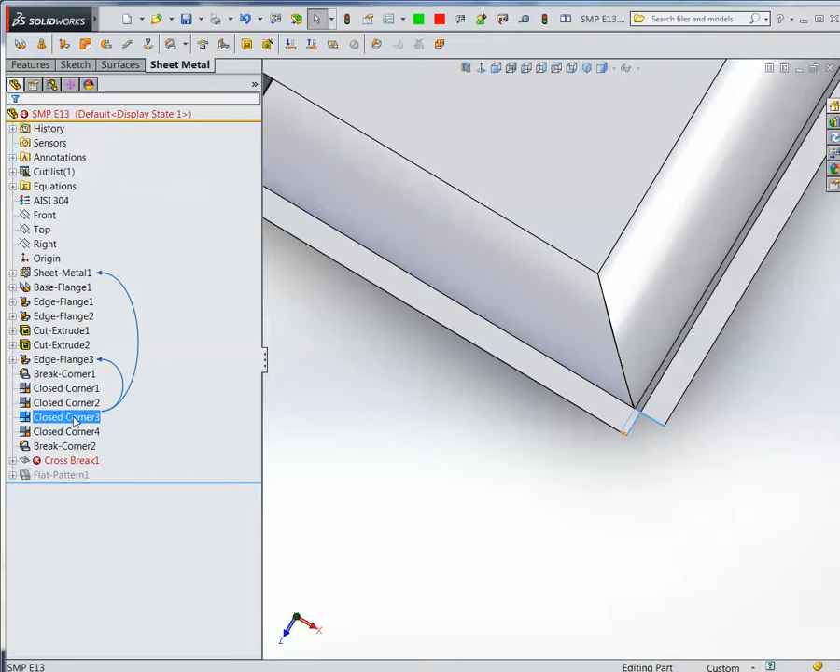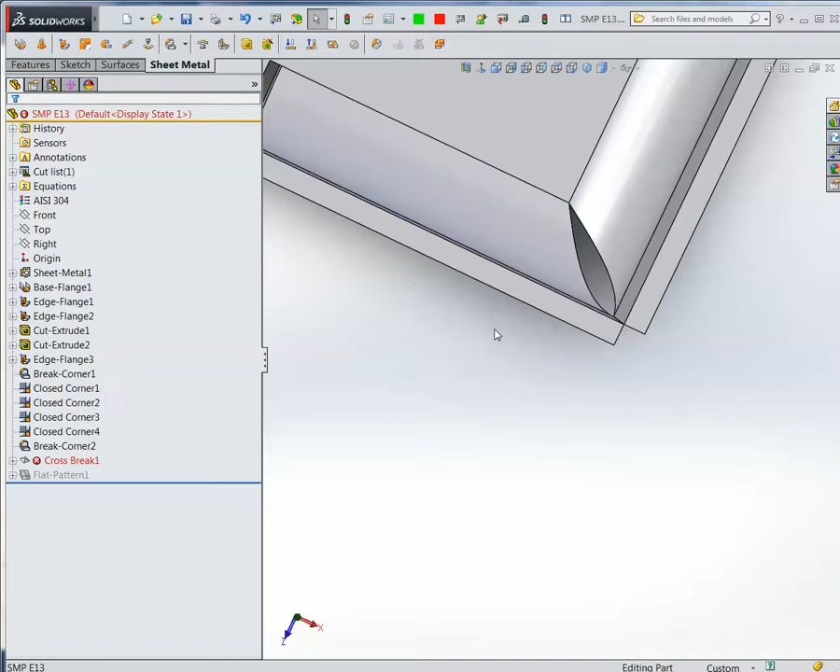And it had another one here I like a lot. I think it's this one. That's a pretty good one, where they're just tangent on the inside. This one is a very large radius, and I picked narrow corner. When I picked narrow corner, it filled it in real nice. If I don't pick narrow corner, you can see what it did to it. It's just a different set of math for calculating what their profile should be. It's doing the same thing, it's just, you know, one is a little more fussy than the other, I believe. So if you care about the visuals, they're worth playing around with.

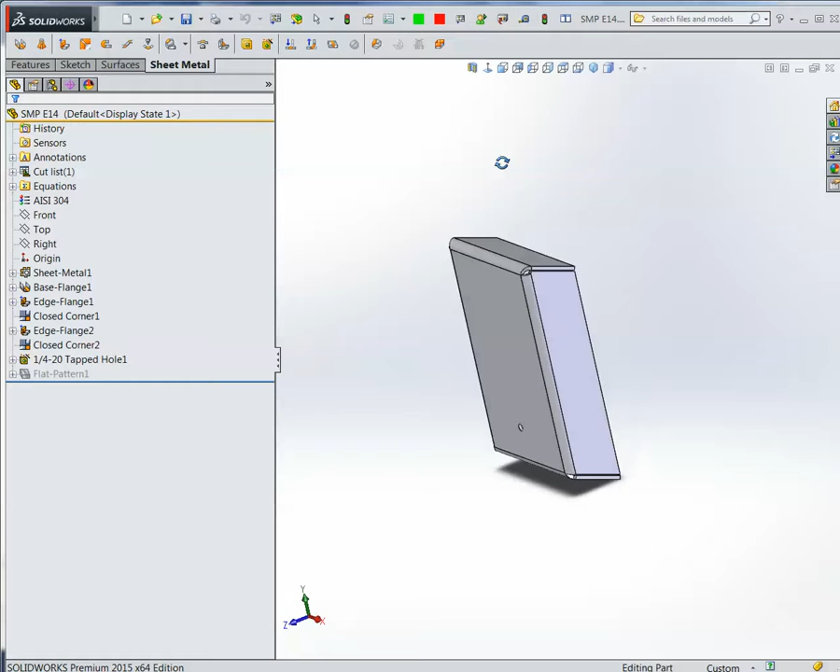It's kind of slow. A lot of our parts we will not bend 90 degrees. We'll overbend it by 20 degrees so that water doesn't pool on the top. And when you overbend it by 20 degrees, then also the closed corner gives you sometimes a look like this, which again does not appeal to me.

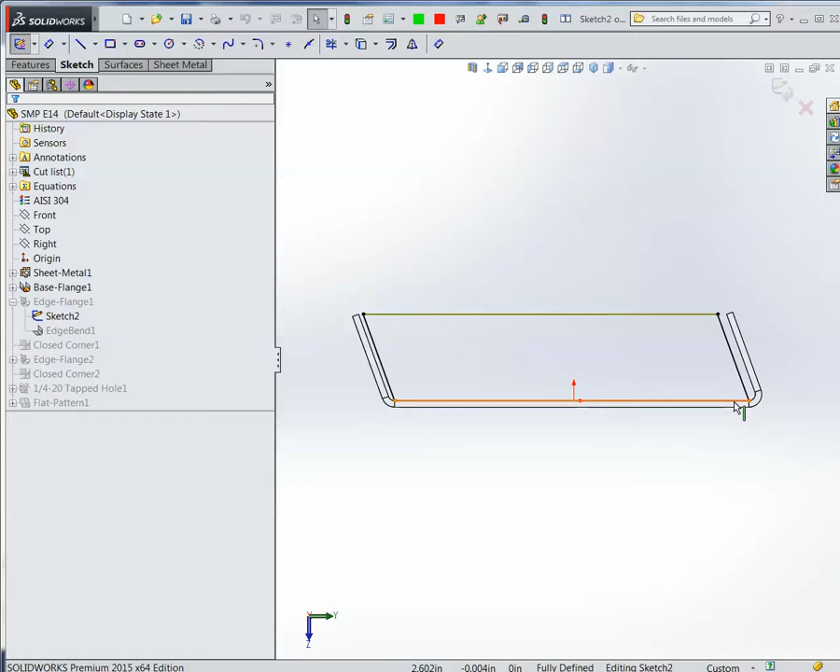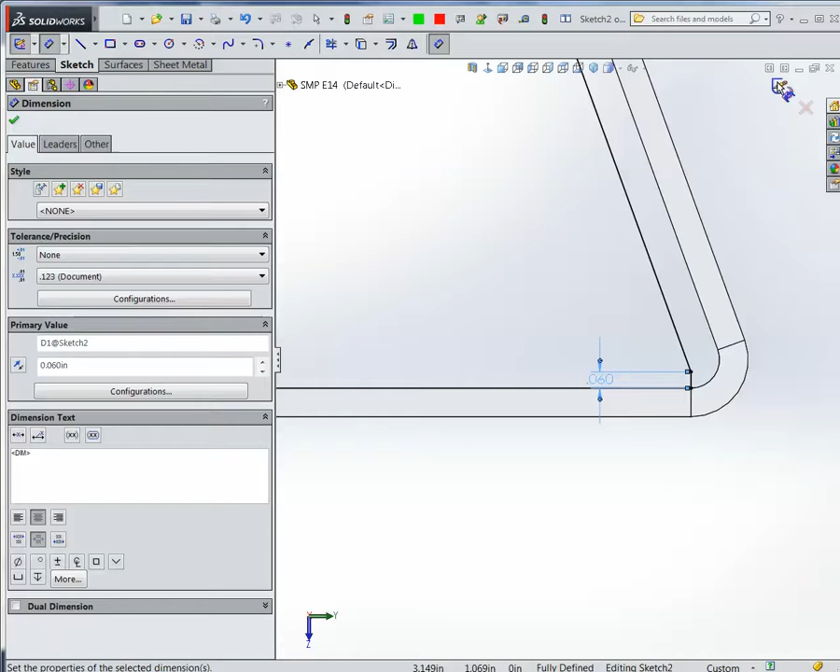So sometimes you have to go into the model of the flange. I believe it's this one. I go into the model of the flange, and I'll just put a vertical line on it first. If I set that vertical line equal to the metal thickness, then when I close the corner up, it's a much more appealing corner. So you don't just assume that the SolidWorks closed corner features can do everything you want. You might have to play around with your profile first if you want a little better looking part.

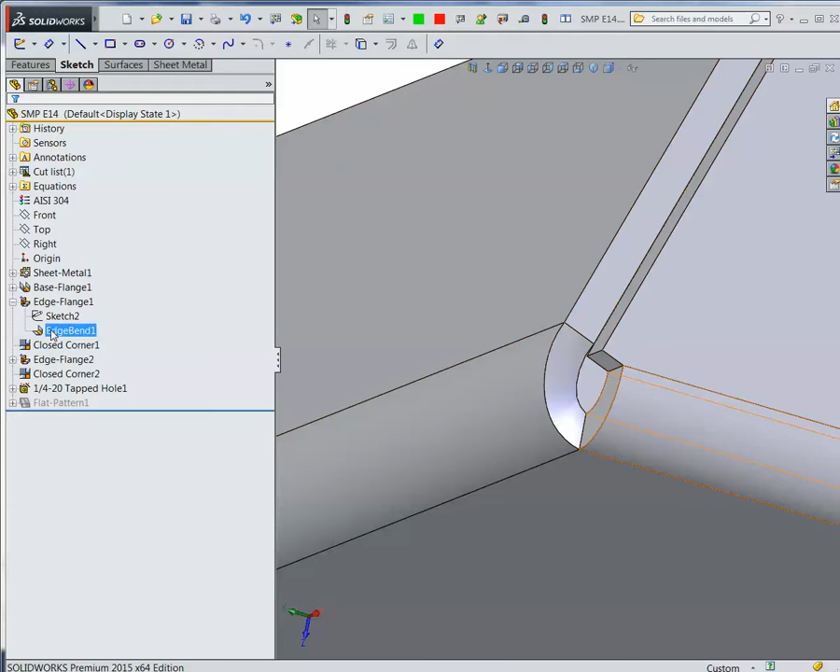And that's a common one I use, is that I have to go up one metal thickness. If I didn't do that, if I went up 0.061, you know, it's giving me that funny look again. If I went to 0.059, I bet you it'd give me that funny look again too. Yeah, so I set it right exactly to what the inside radius is, so it stopped right at the tangent, and I get a very, well, that one did. Well, it was giving me a nice one.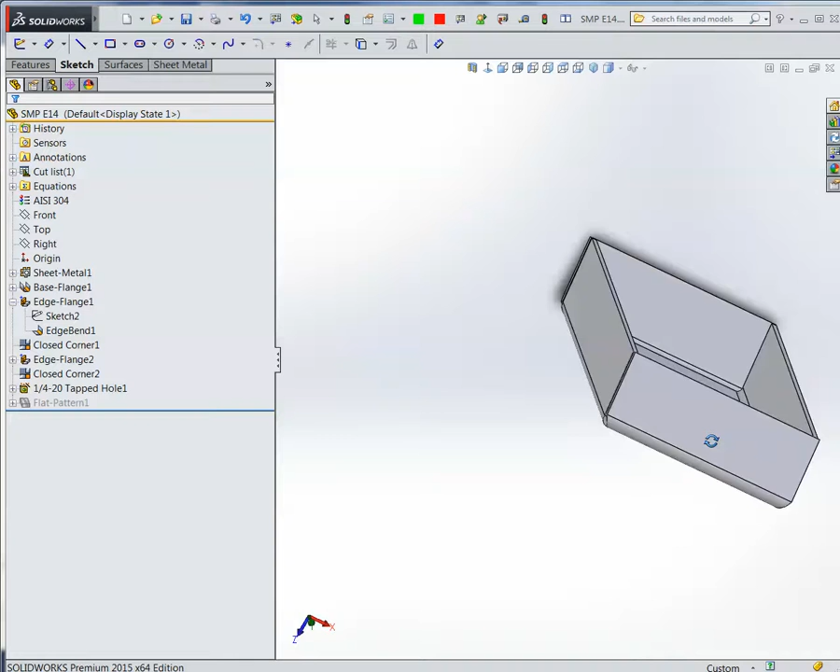Doesn't like me at the moment. Undo, undo. But play around. In other words, play around with it. You'll find a way to get what you want it to get. And I'm just saying, if you like what you have there, yeah, I'll leave it alone. I didn't save it. You're okay. Yep, I didn't save it.

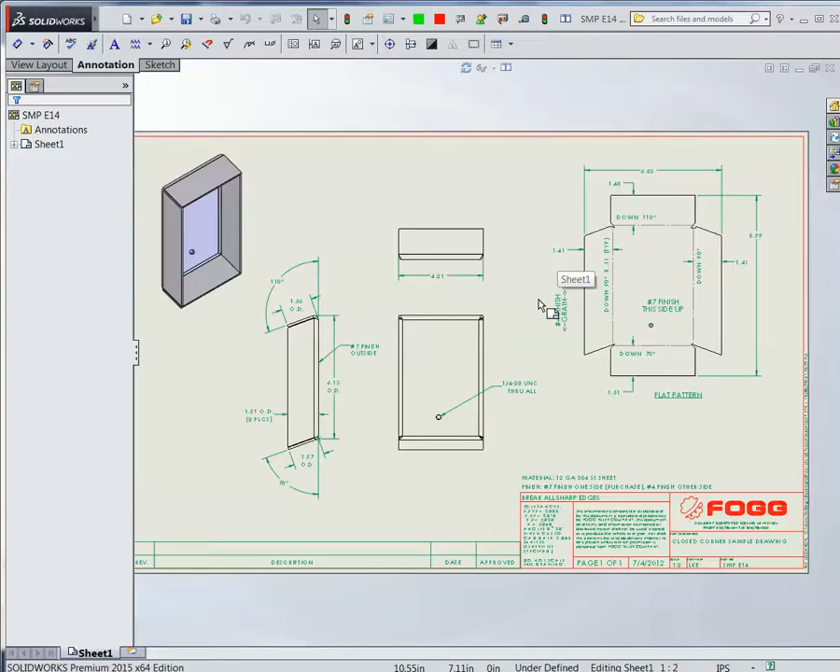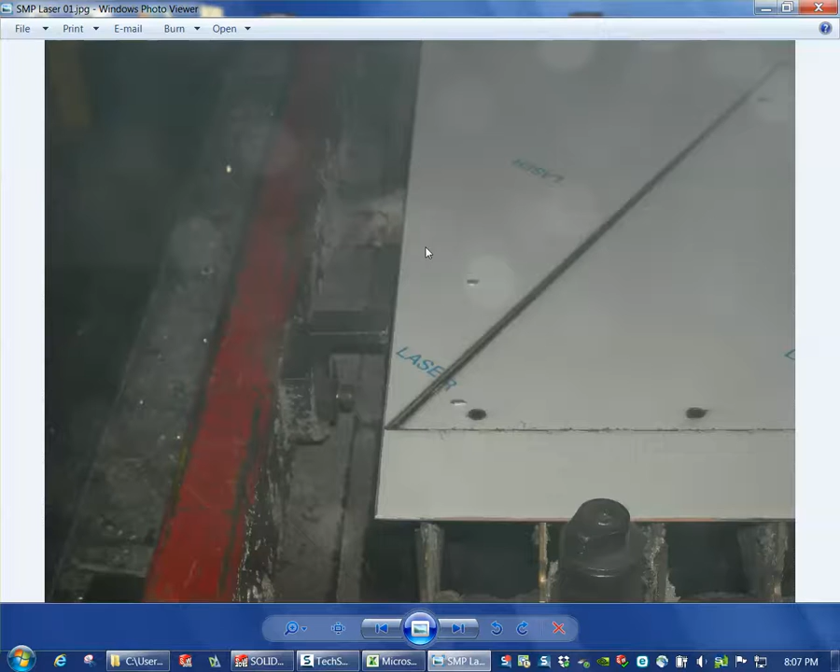And then, I'm gonna go to the last thing here. For me, what makes for a good drawing is a flat pattern with overall sizes, so they know how big of a piece of metal to put on the laser. You got to tell it the good side up, always the good side up. And the reason the good side up, I'll get you the reason here. The reason the good side up is because that's what your laser bed's going to look like. You don't want to lay your good side on that. So the good side is always up.

And if you put the good side down, you probably get your part back from the fab shop bent inside out, because they will put the good side up. And if you forget to do it, they won't see that you put it the wrong way. You know, there's a laser table for you. Here's a press brake. See, for us, they put a 30 thousandths urethane over the dies and bend them up so they don't scar up our metal when they put tool marks in it when they bend it up for us.

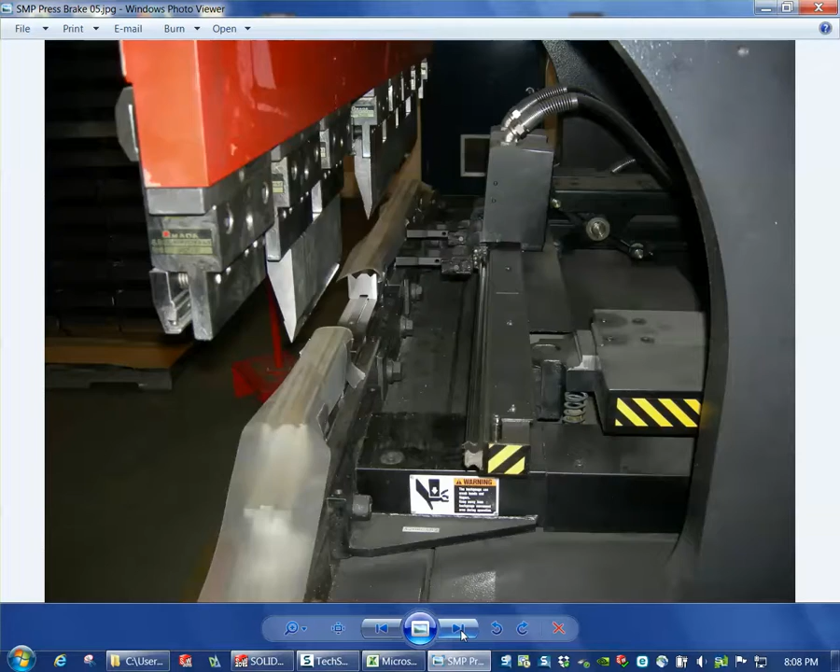And here, you know, a wide die versus a narrow one down here. It just depends on how thick a metal you're bending up. The thicker the metal, the larger the die they're going to want to use, because if they have to push a 1/4 inch thick material, they're not going to be able to push it down through here. So they're going to have a wider die, and when we have a wider die, that means you have to have, you know, longer flanges.

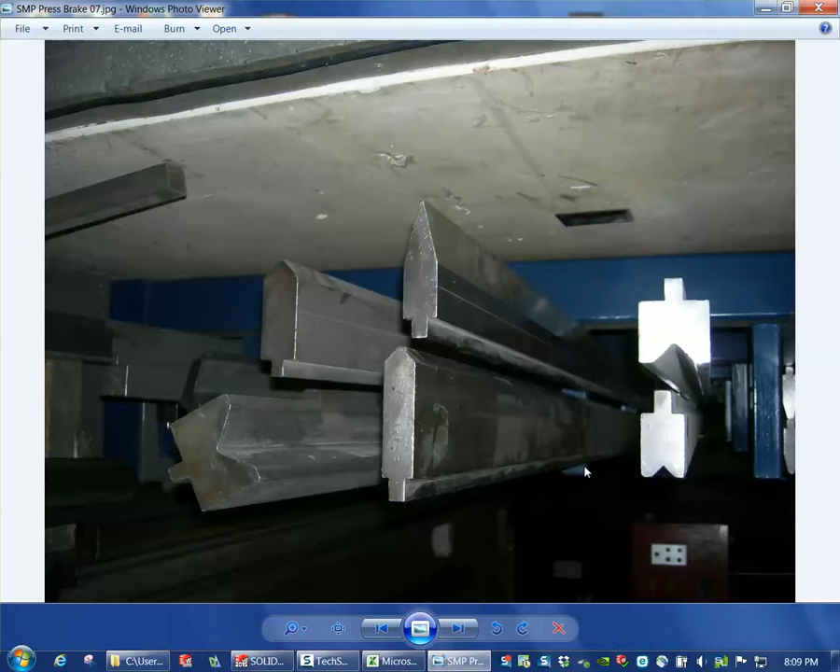Your flange has to be at least from the center line to this back shelf. The metal has to lay on top of there for when the ram pushes down on it. It needs to support. If you leave it shy here and you push down on it, it'll just slip down into your tooling. So the thinner the metal, the smaller of tool you can use, and the shorter of tab that you can bend onto it. And you can ask your fab shop what's the shortest flange that they can do for each metal thickness. It'll change based on metal thickness.

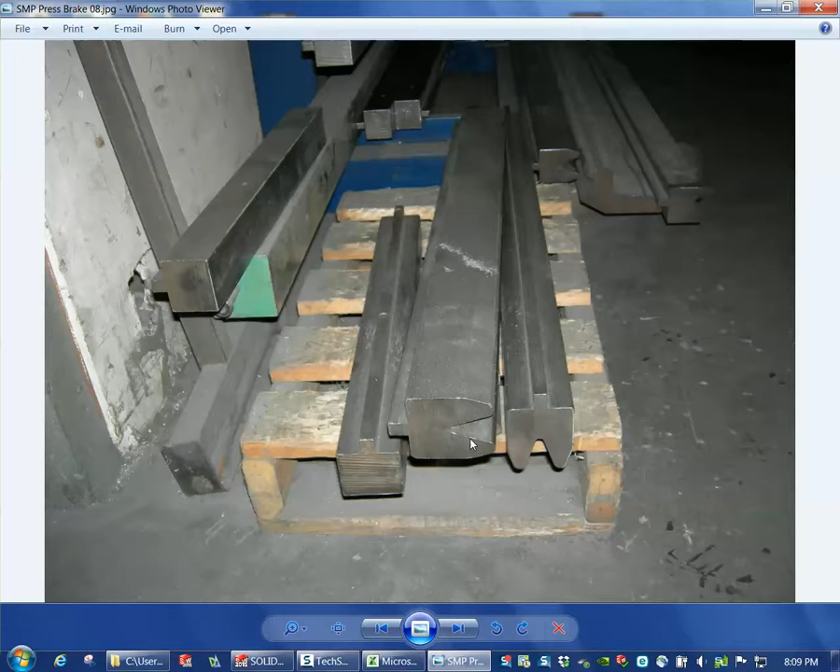Here's a very deep die. Frequently, if we still want something flattened or over 90, they'll just put a regular die in it that you saw before, and they'll bend to 90. Then they'll come in here and push it in deeper to go over 90. If we want it hemmed, they'll go a third time and put flattening dies in it that are just flat like this one here, and then just push it down and squish it the rest of the way. So it's a 3-step process to get it hemmed over, at least on the thicker metals.

And whatever radius you want, just get some bar stock and weld it to a 1/2x4, and they give you the radius you want. But they might not have a problem. You might have a problem with the bottom die, getting something that works.

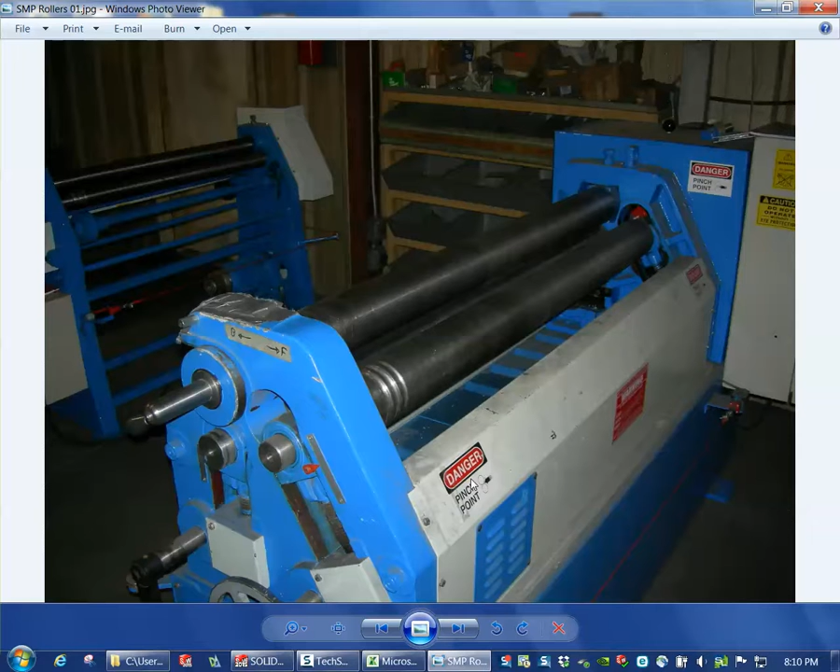How much radius do you usually have it over? What's that? Fold it back on itself? What's the radius of bend on the bottom, at least the metal thickness? No, that's an experimental thing, because they'll bend it with a 1/16 or an 1/8 inch radius, and then they'll overbend it, and then they'll put 2 flat dies in and just squish it, and it turns out to whatever you do. If you got 24 gauge, it'll be next to 0. If you got an 1/8 inch, you're gonna have a teardrop in there.

And the rollers too. The K factor on those, I always use 0.5. The neutral axis is about in the middle, because it doesn't squish it like a press brake would.

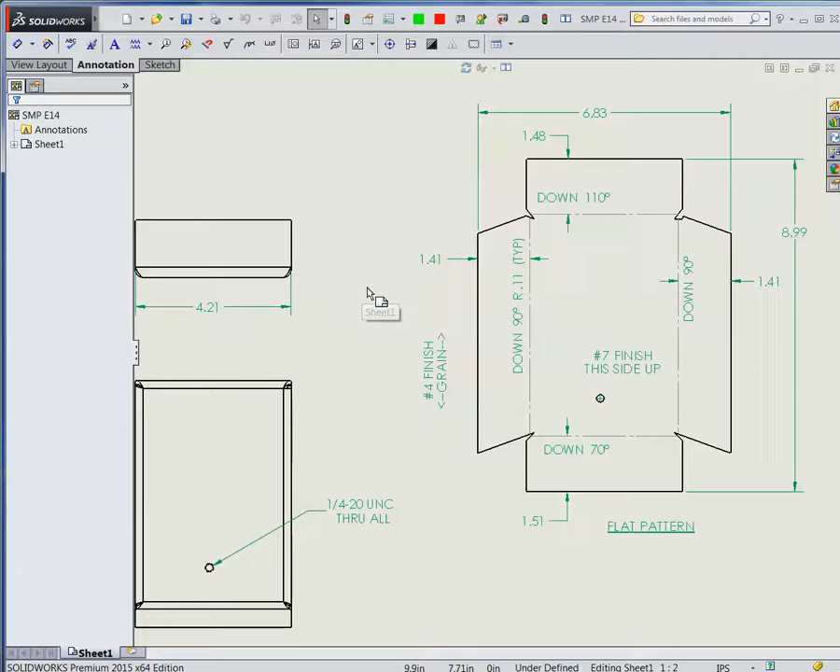And the last thing I wanted to show, well, I showed just overall dimensions, what the press brake operator has to do. It's got the angle on there. Maybe one of them will have the radius on it. Your radius 0.11 typical. And you can edit that if you right click and say edit text in the window, you can get it says bend direction, bend angle, bend radius. If you want to put words in there, you can put words in there, but it needs this syntax to go find this information from SolidWorks and put it here.

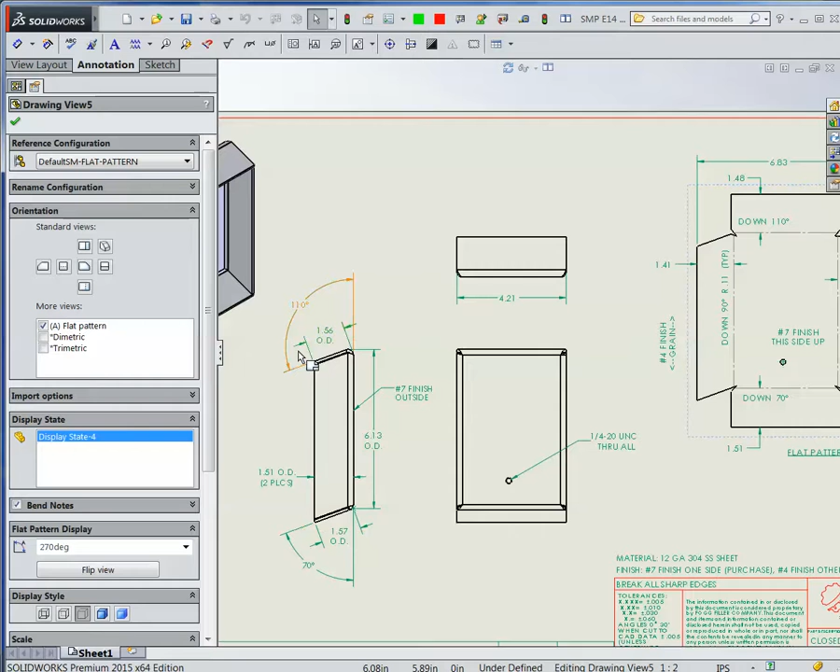And if you laid your flat pattern up here with the wrong side up, if you pick in that area, there's commands. Here it says flip view. You flip the view, and the part flips around, and all of a sudden this is up and up rather than down and down. You always want to flip it until you get the good side up. And on your part, you want overall lengths and angles, and reconfirm that that's the good side, or the number 7. Finish goes to the outside.

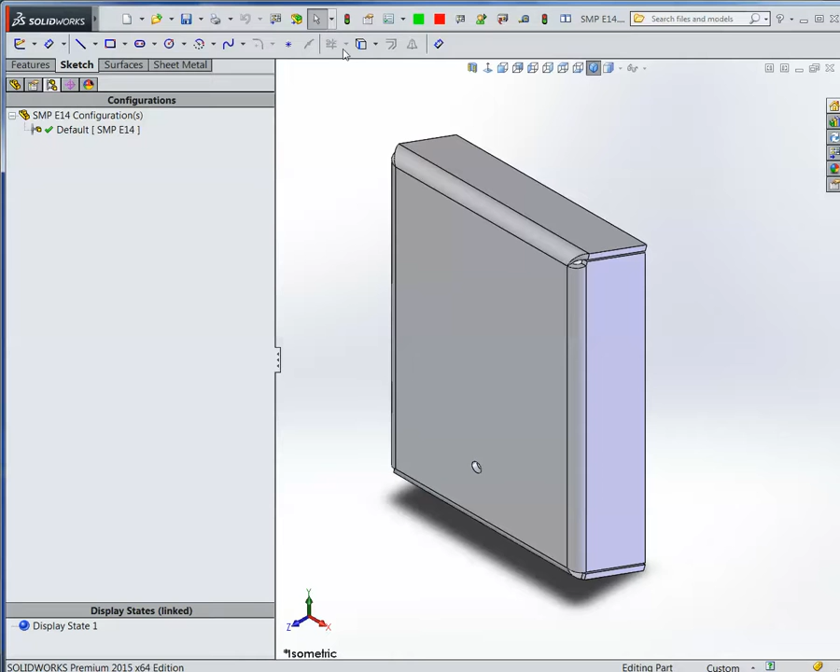And if you have problems with SolidWorks not having a flat pattern for you, say it doesn't have it, it's a derived configuration that goes back and it unsuppresses certain things. But you don't have to make it yourself. You can just say, make me a drawing. Say, make a drawing. No, I don't want to use existing one. If I make a new drawing, I don't care what that is. When I'm in here, if it doesn't show up, you click the part you're on to make sure it's there, then you refresh it. It'll come up with a flat pattern.

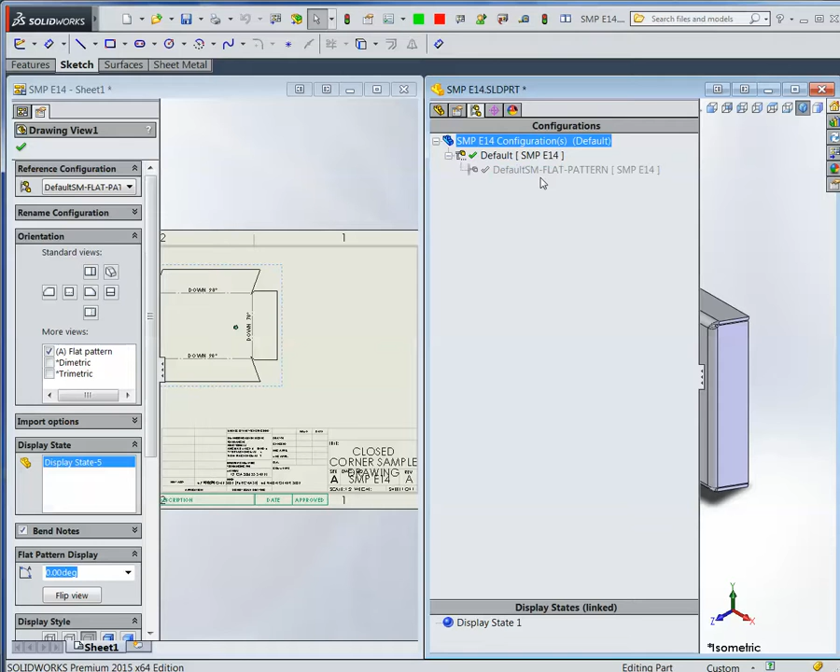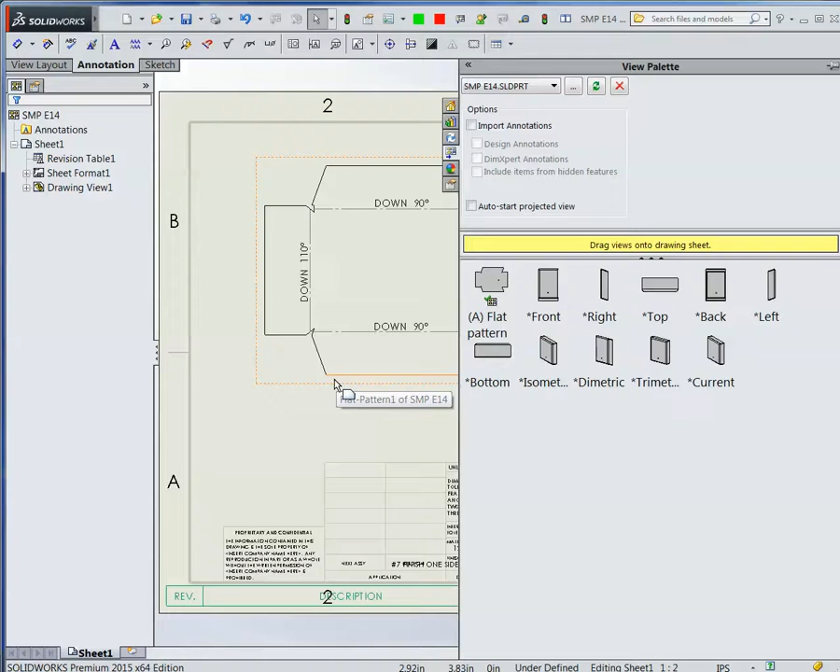When it comes up with that flat pattern, if you go back to the model, it'll now have that flat pattern in there. It generates that flat pattern when you go to the drawing and go to the view palette. And when it opens up here and there's a flat pattern, then that's when it writes it to the model. You just got to make sure you go back to your model and save it. Sometimes it'll write a second or third flat pattern in there. You got to look in your drawing, see which one you're using, and delete the other two. Delete the other one.